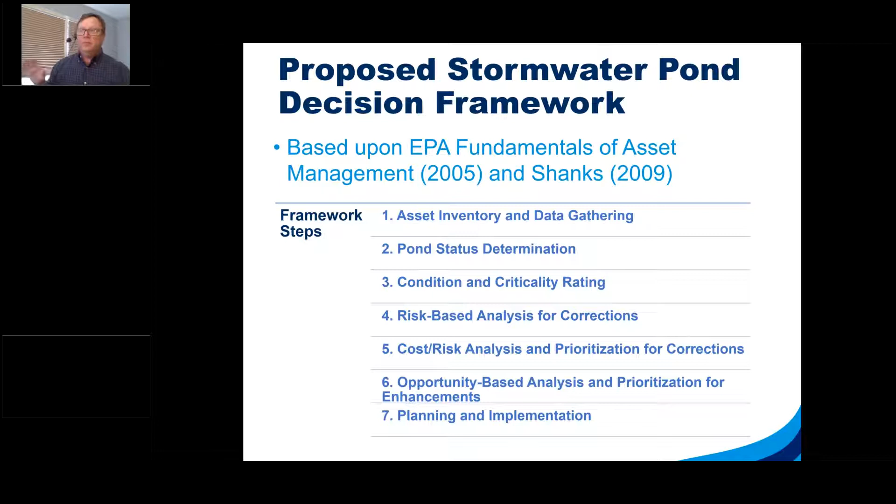We've got 7 steps. You could have 6, you could have 10. We chose 7 on this. We'd love to get input from others as much as we can. We do know that there are other decision frameworks out there. There's a million ways to look at this.

You could have flowcharts. This is an example of a flowchart that kind of gets to the same type of thing. This is from Kitsap County in Washington state. They manage half of the ponds in their area, and this is a way for them to understand how they can make decisions about retrofitting, as an example. This is another example from EPA Region 1.

I think it's from New Hampshire.

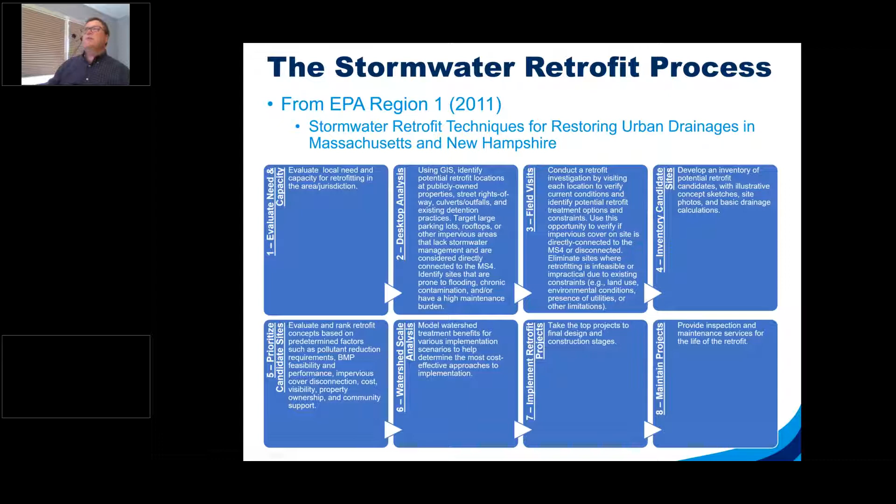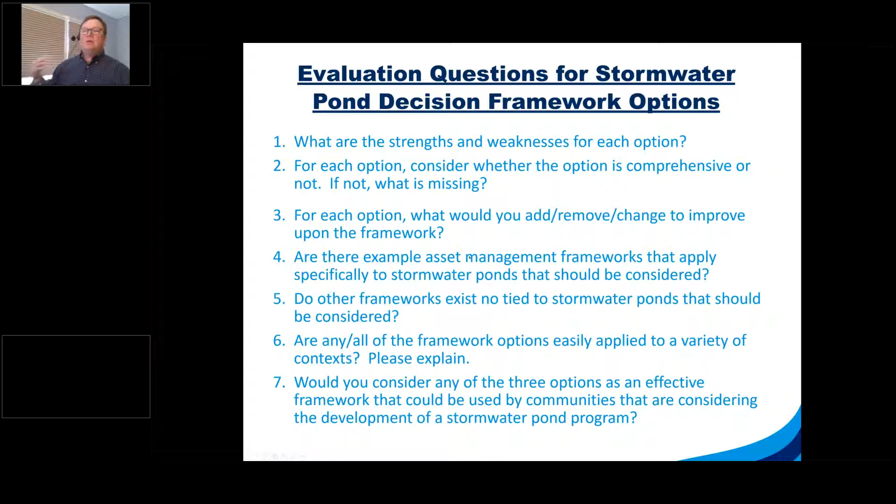Again, it's an 8-step process looking at retrofitting in general. We're talking specifically focused on ponds. So I'm not going to go through all these questions, but all this information is made available for you to look at. If you're really interested in providing input, we'd love to see it. These are the kind of questions that we're hoping to get addressed through this input from different folks.

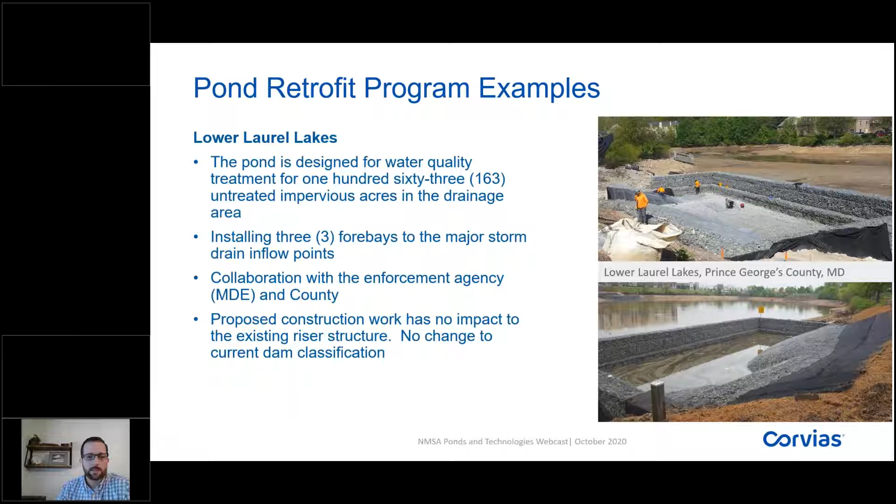Here's another example, Lower Laurel Lakes Pond. It was designed for water quantity treatment, but we've been able to retrofit it and provide water quality treatment to 163 untreated impervious acres in the drainage area. Again, it's another opportunity where we've created a mechanism to get in and get those sediments out as needed and as quickly as possible.

The other great thing about ponds is that not only can a retrofit bring water quality function to an existing water quantity pond, but it also gives you the opportunity to work with the jurisdiction to armor that pond for future resiliency issues. For example, here, as we went through the restoration process, we restored the emergency spillway and reinforced it with Flexamat. A lot of times, in order to get a water quality benefit, we're also enhancing the volume and capacity of the pond, so there are multiple benefits overall.

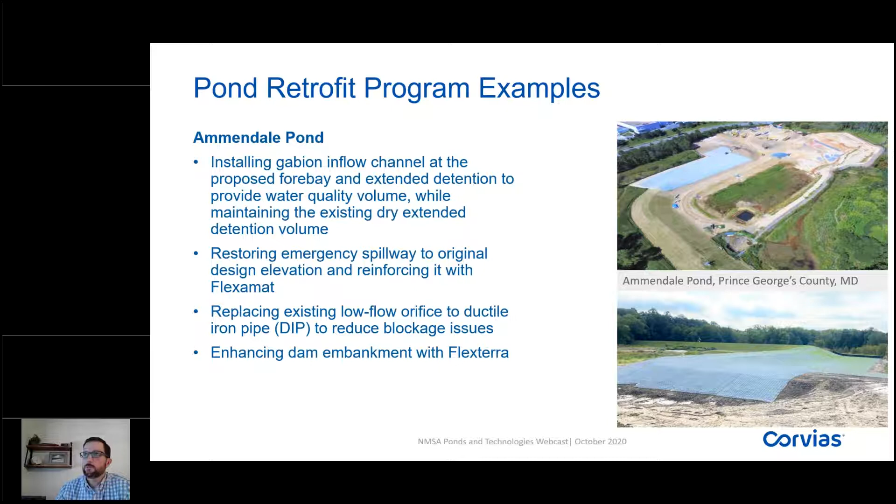This next example is a unique project we have in planning that's hard to come across in a lot of cases, where we're actually going to create a new pond in an existing dry creek. It's hard to get access to this type of property, and we were able to collaborate with a local private developer who is giving us easement access to put this pond on his property. It's a benefit to him, but also to the overall drainage area. There's currently 190 acres, and we will get water quantity control for about 190 acres with this pond.

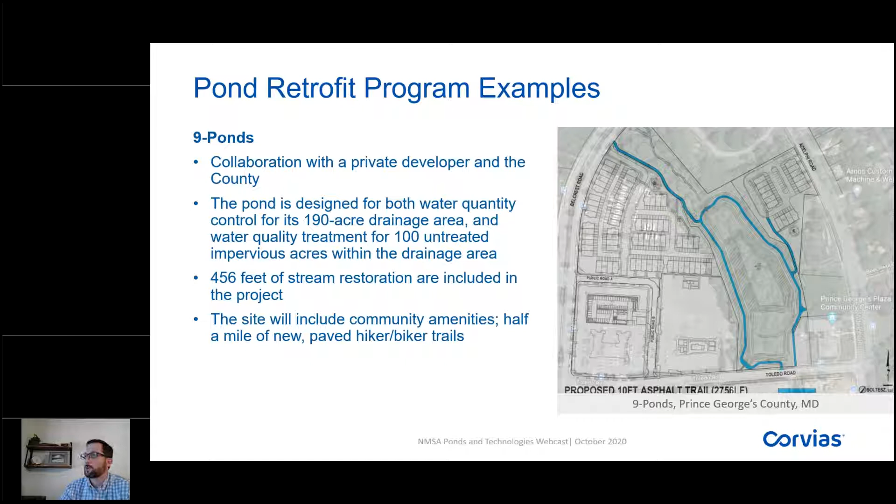It's an in-stream pond. Like I said, it's a dry creek bed, but it's designed in a way to allow water to flow through versus having a typical dam or embankment with an outfall associated with it. Also, as part of this project, we'll do about 456 feet of stream restoration.

This last pond example is a unique situation in the city of Chester, where there's not an existing pond. We have an existing park with really large flooding challenges. Part of our solution, which we're working through right now with the jurisdiction, is to create a large retention basin. We'll probably be looking at leveraging technologies similar to what Opti provides in order to control the levels of the pond and get the maximum benefit out of the retention of that facility.

So long story short, this is kind of where I wrap up and ask for your questions.

The key for us and the investment we'll make long-term in technology is related to the long-term maintenance of these programs. As we build this inventory of assets, it's going to be really important to make an investment at some point at a bulk rate on monitoring the flows and the capture of these devices, so that we can disperse the crews appropriately and efficiently to maintain these ponds. As everybody's discussed previously, that's the key to reducing the pollutants. So that's my speech. Thank you.

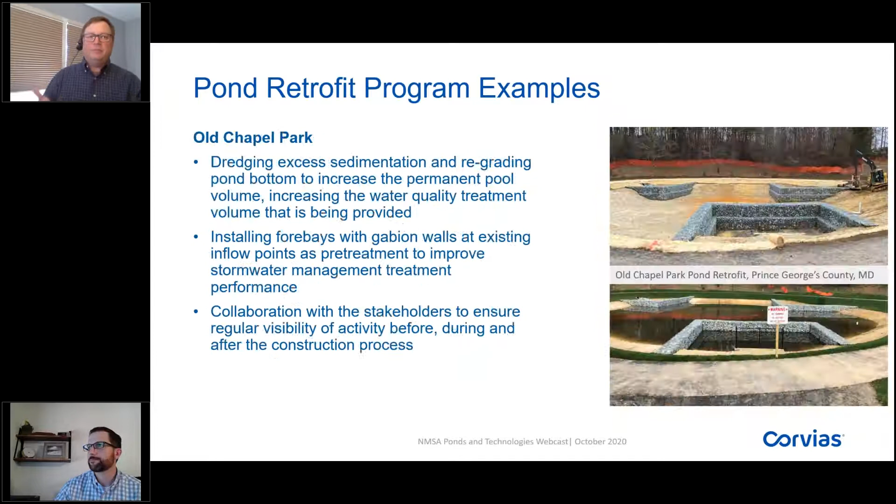There's other aspects of this which are fixed fee, right? So there's a certain risk that you do - there are some elements of P3s that you guys do take on, which is taking on risk. You could provide private financing support, but you're kind of agnostic on that, as I understand. So are there some nuances there you can talk about? Because that's going to set up our poll question, and then we'll move on to the next speaker.

Yeah, there definitely are, and I think what's important is it's a customized approach, depending on the community and the jurisdiction. You're exactly right, Seth - a lot of times we're going to bring the benefits that the community wants to see, and each community has their different goals. If a particular community just wanted high efficiency delivery, which is closer to what we see in certain jurisdictions, then we are going to set the program up that way, and make sure that the teams and firms we put together and the way we build the program reflects that.

So you mean high efficiency versus social or community kind of - is that what you're talking about? So like lowest cost versus providing support to the community, is that the balance we're talking about? Right, you can have both. Generally it's going to be lower cost overall because of the scale that we're working at, and the fact that we're 100% focused on this.

Our only goal in life is to be focused on delivering the set scope that we agree upon with our partner, and we operate almost like an owner's rep, where we're making decisions and working with our partner, managing the process and delivery of the program to get those outcomes that they want. Those outcomes are established through that partnering effort, which is really important up front - when you're entering into these partnerships, it's really important to establish what are the goals in that local community.

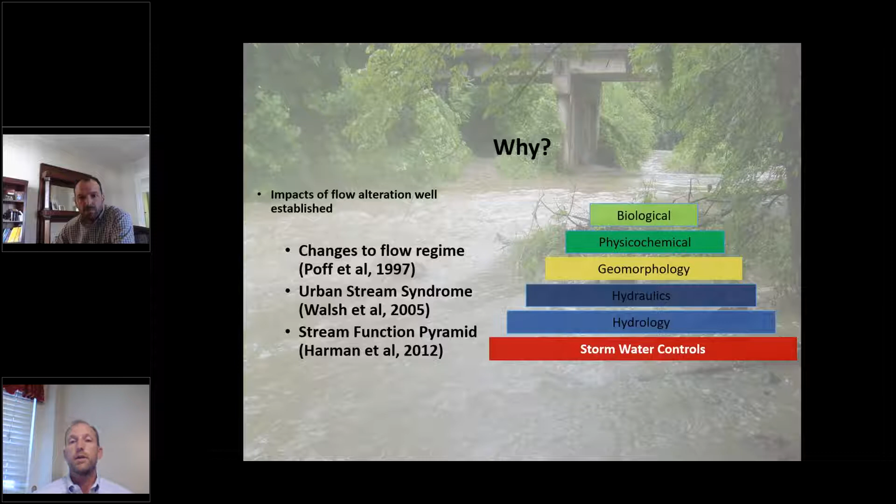That led to further work, maybe more suited for practitioners, the applied side of things—looking at things like the stream function pyramid by Will Harman in 2012. This was one of the things that got my wheels turning and got things moving inside my agency, that maybe this is the approach we could take. As the stormwater utility designs requirements and performance standards for stormwater controls, if we keep the hydrology in mind, we can reduce the impact. If we design our controls such that we're mimicking or matching hydrologies, then we can have a positive impact throughout the stream as it moves up the pyramid.

So you have to wonder what's taken so long, some of the barriers we've dealt with in the past. We've heard a lot about different things, and a lot of it has to do with the lack of a goal or a target or a threshold. We didn't have that exact number to manage toward—it was more of a theoretical design storm that this should work. That was part of the problem.

Regional variability was something we didn't take a lot of consideration of. Historically, we've looked at stormwater management more as a broad brush approach, a one-size-fits-all, and that can lead to problems too. My own state of Kentucky is a perfect example—mountains in the east, swamps in the west, and everything in the middle. It stands to reason that management practices for the mountains wouldn't be as applicable in the swamps. So we have to think about the regional side of things.

We have to think about the baseline condition—if we don't know where we are, we don't really know where to go. So we really have to understand how the streams in our systems are reacting to stormwater runoff. Then there are other complexities we've heard mentioned already today, the social side of things—getting folks to understand why we need to manage stormwater, why we may need things like a stormwater assessment fee, which leads into the financial side of things, getting folks to understand these kinds of things don't happen for free.

And then unfortunately, there's the political side of things, because rarely do we get policy development without politics being involved. So we have to do a really good job of talking to our elected officials and making sure that political appointees who help manage utilities really understand what's going on behind these decisions.

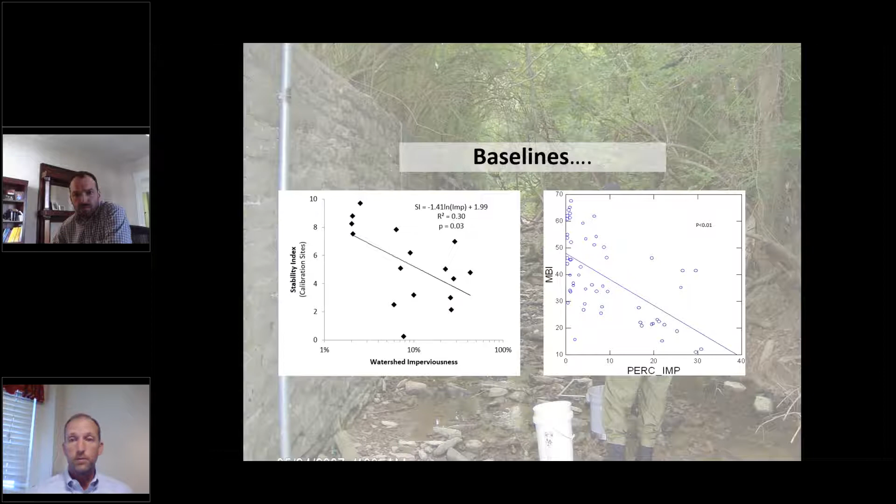We took all that information to establish our baselines. Again, we needed to know where we were in order to know where we were to go. We have been able to document that streams are becoming more unstable as watershed imperviousness increases. We're seeing the same kind of trend within our biological communities, as our biotic indices go down as impervious surface increases. These are well-established trends, but in order for us to really demonstrate that we're doing a good job, we need to establish this in our region as well.

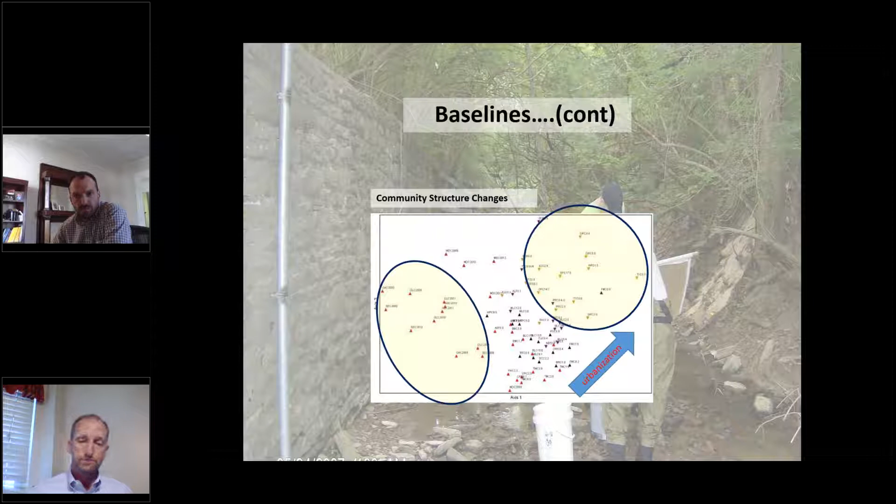We needed to establish the thresholds I mentioned. If we do want to have a program such as this, we need to understand what that threshold is. That introduces the critical flow concept - where's the point in our streams that the bed load begins to move around and the banks begin to erode? And we've been able to do that in northern Kentucky.

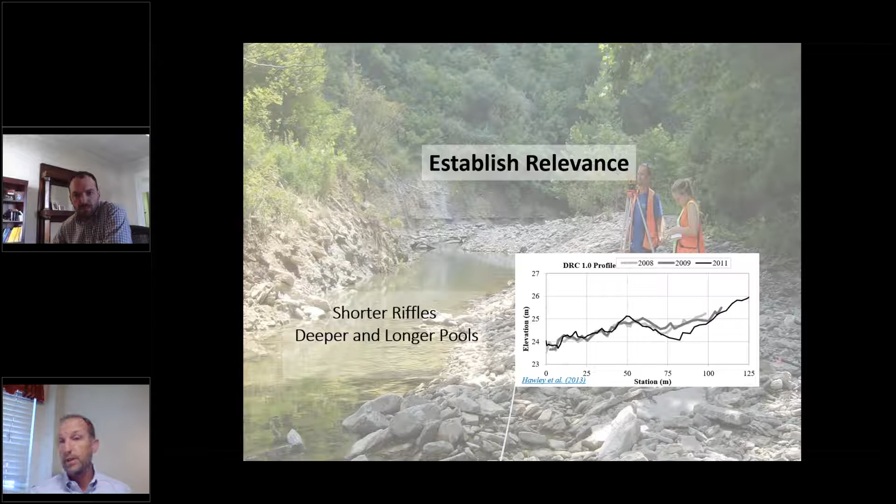We've established the relevance of those programs. We're seeing things like riffles getting shorter and pools getting deeper, which we know can be detrimental to both the habitat evaluations as well as the biological communities that live there.

Making even further argument for the biological relevance of the approach, we kind of stumbled into an accidental experiment a few years ago. In 2011, we had a very wet year in northern Kentucky, double the amount of precipitation we typically get, coupled with some very large events mixed in. Our best reference stream, which always produced very high diversity and high quality index scores, reacted as though it was an urban stream with communities more similar to what we see in our urban system. However, in 2012, when precipitation patterns returned to somewhat more normal, the stream recovered. We're not seeing that recovery in the urban system, which makes an even further argument for working with the hydrology within the system to restore the streams.

Excellent, thank you Matt. Matt set the stage really well, and I know this webinar is on ponds, but this baseline background information is really important for this setting.

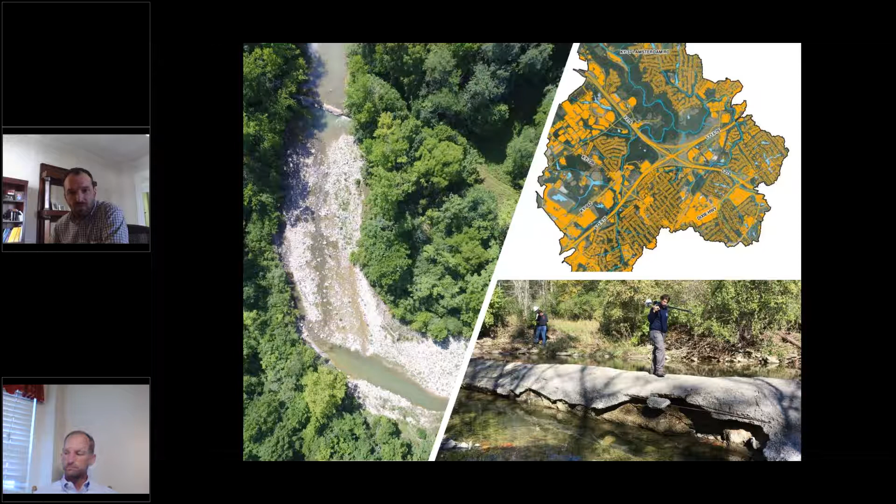One of the things you all will not be surprised about - take this watershed here, Dry Creek, and the relevance to the politically appointed board members, for example. An unstable stream is not ecologically beneficial, but it's also not even in the best interest of the sanitation utility. Here's one of the main trunk sewers in SD1's jurisdiction, and over 40 years of down cutting about 5 feet or so at this location, you've exposed the stream and put the sanitary sewer at serious jeopardy of potentially failing and causing a direct discharge to the stream. So once unstable streams started impacting SD1's assets, it became even more clear the financial relevance of managing stormwater to prevent these down cutting trajectories, bank erosion, and channel instability in general.

In terms of water quality, we measure for everything, but bacteria and sediment are by far the number 1 and number 2 pollutants in our developed watersheds. Sediment in particular reaches up to 65 times benchmark loads in some of these developed watersheds, and we have pretty good evidence that a large majority of that sediment is coming from bank erosion of the stream banks instead of the catchment.

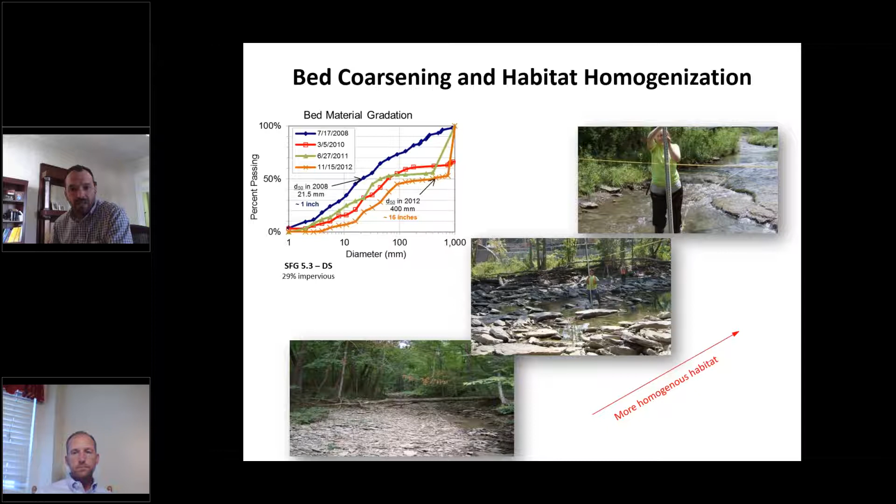Matt mentioned some of the trajectories we're seeing in the stream. Habitat homogenization and bed coarsening is one trajectory. Here we see shifting bed material over a 4-year period. The D50, the median particle size, went from 1 inch to about 16 inches over that time. So we see coarser, less well-mixed particles, less diversity, and fewer niches for the critters that live in these streams.

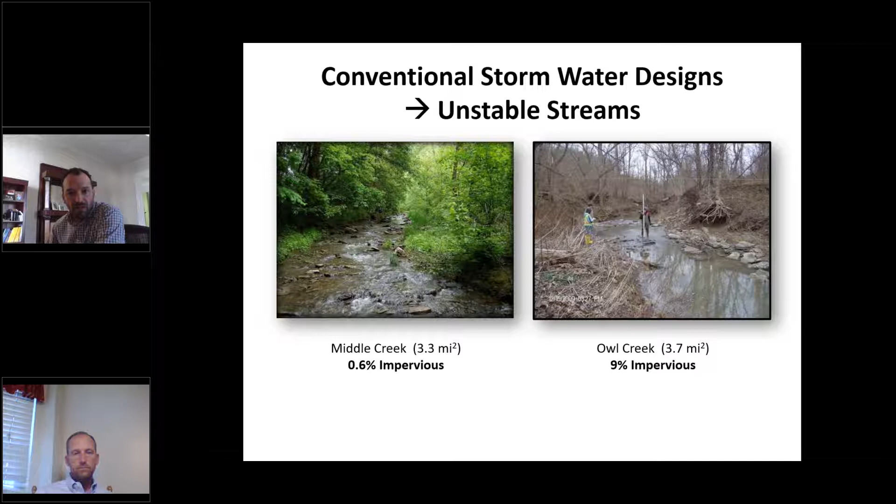Matt's monitoring program established pretty well that conventional stormwater designs were leading to unstable streams. Here are two sites with very similar drainage area. The only difference is imperviousness, and pictures say 1,000 words, but so do the cross-sectional surveys. The suburban stream, at 9% impervious, is about 9 feet to the floodplain. Middle Creek, our reference site, is only about 3 feet to the floodplain.

As Matt already mentioned, we see a very precipitous drop-off of EPT richness—that's the mayflies, stoneflies, and caddisflies, the more sensitive species. Once we get above 3% impervious area, we see pretty clear impacts to these taxa, and above 10%, we've pretty much bottomed out. So it's clear that conventional stormwater management is not protecting stream stability or aquatic biodiversity.

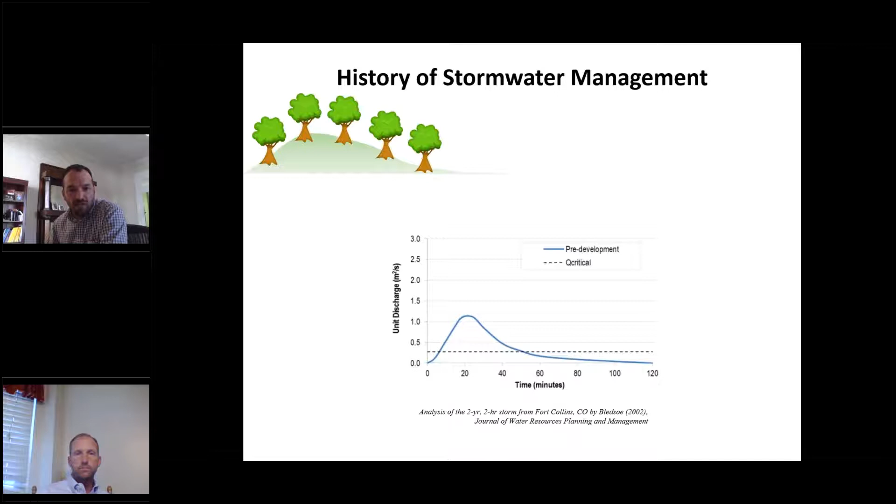Getting back to the idea of ponds, it's important to remember the history of stormwater management. Let's take a pre-developed flow regime—this is the 2-year discharge as an example. From pre-1950s all the way up to the 1980s or so, you develop the watershed, add roads and houses, and route that stormwater as quickly as possible to the nearest creek. So all that extra volume has resulted in an increased peak.

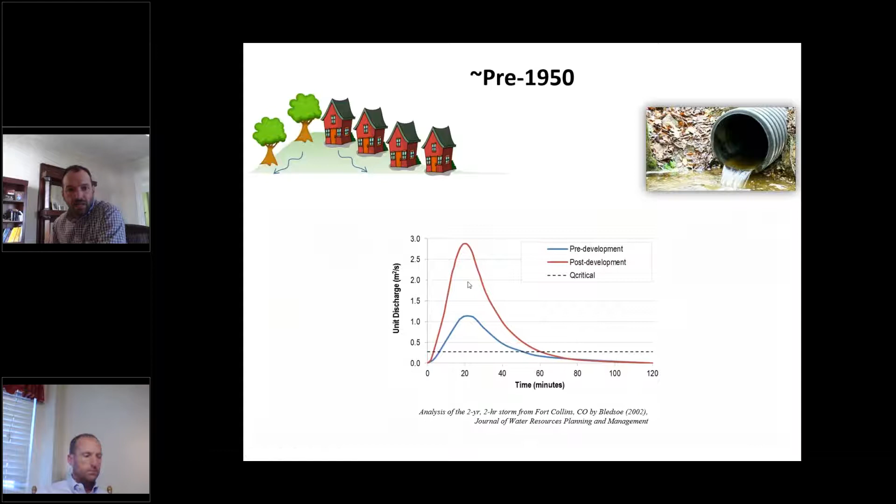That led to flooding downstream, and engineers scratched our heads and said, this isn't good—we're supposed to protect the public. How do we stop that? So we came up with this idea of peak matching: you take that extra volume, route it into a detention pond, and hold it back so you're not exceeding the pre-developed peak discharge for a given design storm. But you've got a lot more volume that you're releasing at those relatively large flows.

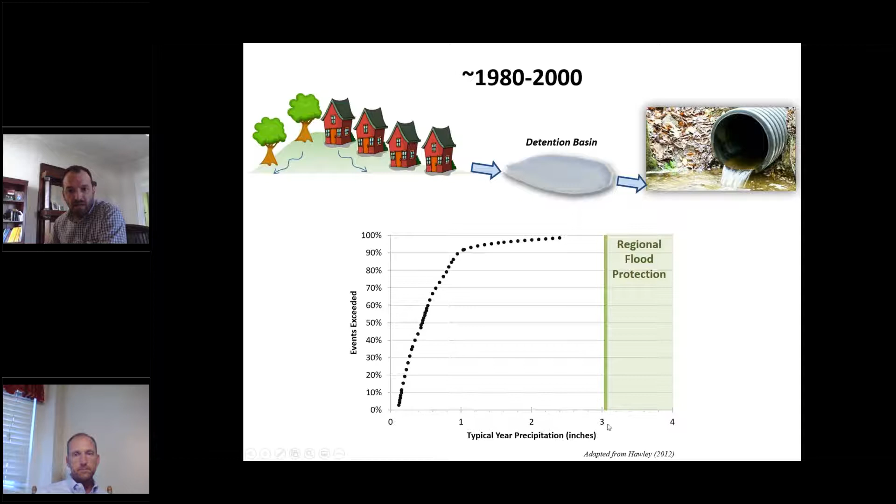You look at most stormwater ponds, especially dry detentions, and they're almost always dry, even during rainstorms. Yes, I do use my kids for inspecting basins sometimes, but the reason they're mostly dry, even during events, is that they're typically sized for and their outlet structures optimized for regional flood protection. It varies by jurisdiction, but in Kentucky that kicks in at about 3 inches of rain. Of course, 99% of the storms in a typical year are much less than the 2-year discharge.

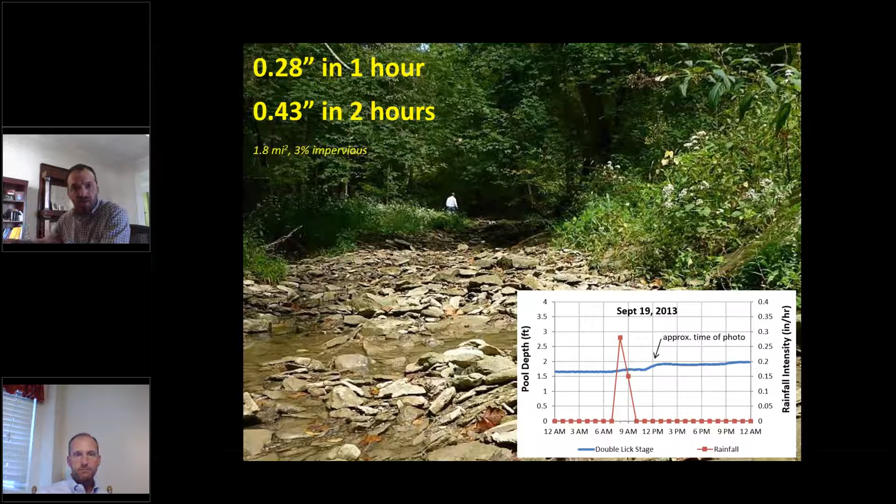So what happens in an undeveloped watershed? The water infiltrates, hits the leaves, slowly makes its way to the topsoil, and then in Kentucky, where you've got a clay subbase, it hits that subbase and seeps down the slope, eventually making its way to the stream about 3 hours later with this little blip in the hydrograph.

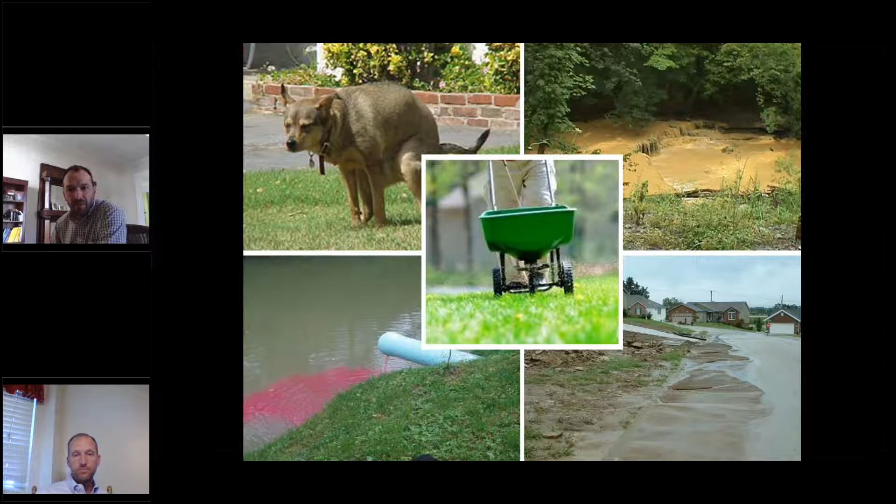I'm sure a lot of the pond webinar has focused on water quality concerns. Going back 20 or so years, that was a big deal that ponds were not dealing with, so the idea of the water quality volume came into fashion in the 2000s or so—taking a reasonable amount of water, say 80 or 90%, that captures 80 or 90% of the storms in a typical year, and getting it routed through some sort of treatment.

So you take a detention pond and you put a sediment forebay on it, and you size the outlet structure to be kind of an extended detention basin, like some of those Gabion retrofits we saw from Pete in terms of knocking down the sediment load. They take various forms—they can look very pretty and really fit with the community, with what their goals look for at a specific location.

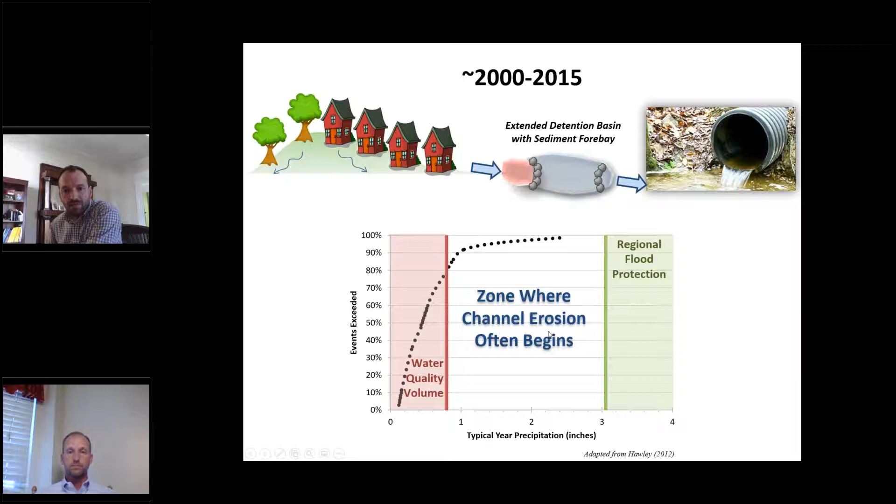But in terms of channel protection, the zone where channel erosion often begins is in this unmanaged zone of rainfall. So let's get back to that critical discharge. Matt mentioned it earlier—it's really the discharge above which you are mobilizing the material on the bed.

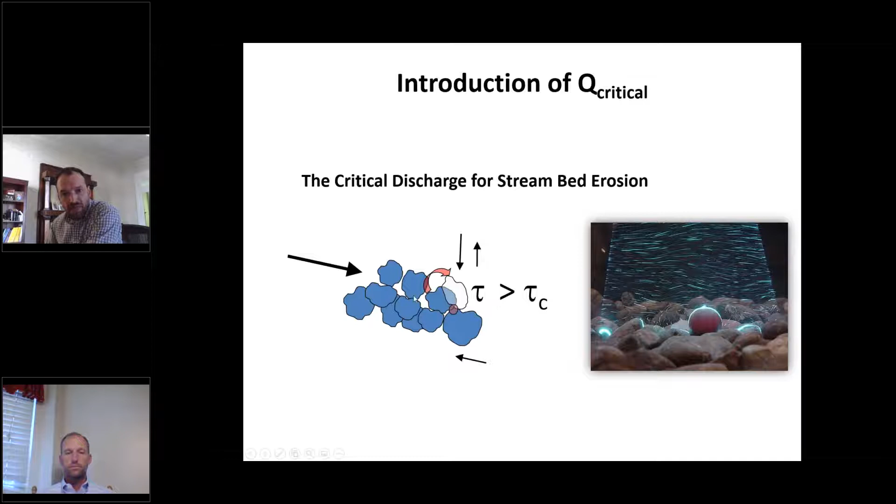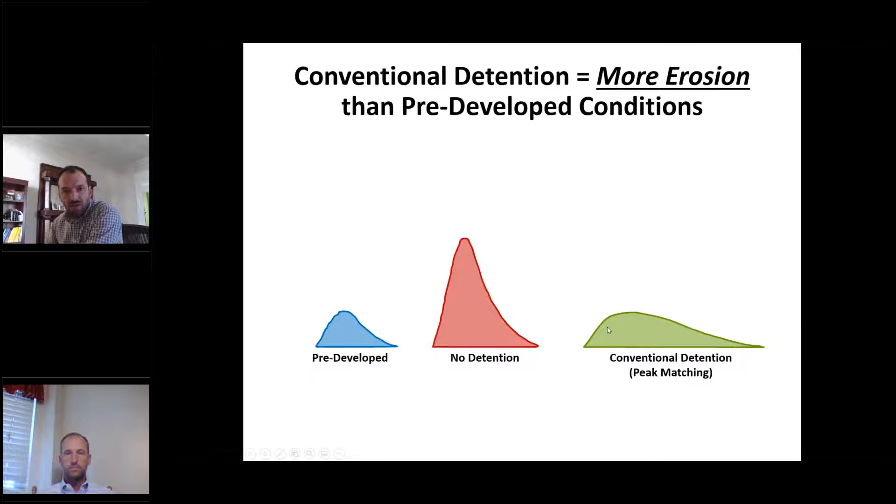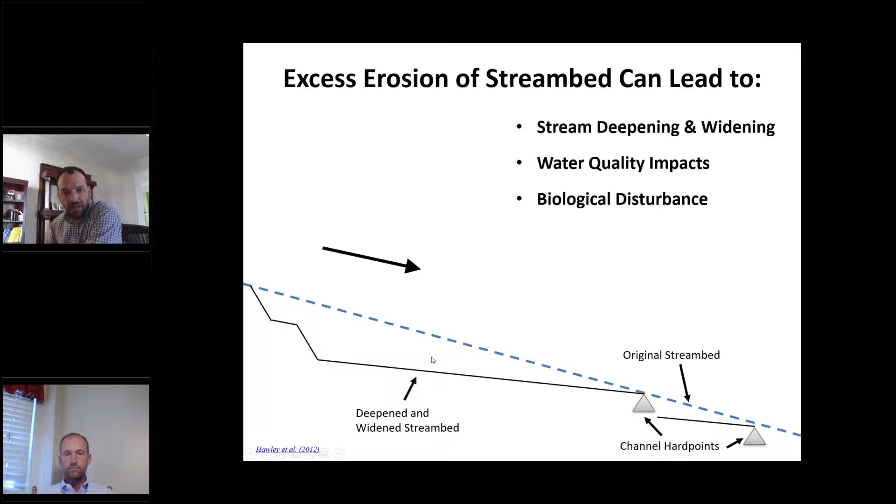That leads to more erosion than the pre-developed condition. Excess erosion of the stream can lead to stream deepening and widening, water quality impacts, and biological disturbance. So imagine you continue this over and over—the particles get mobilized, they're not replaced from upstream, and over time you've scoured out those particles from your original stream bed.

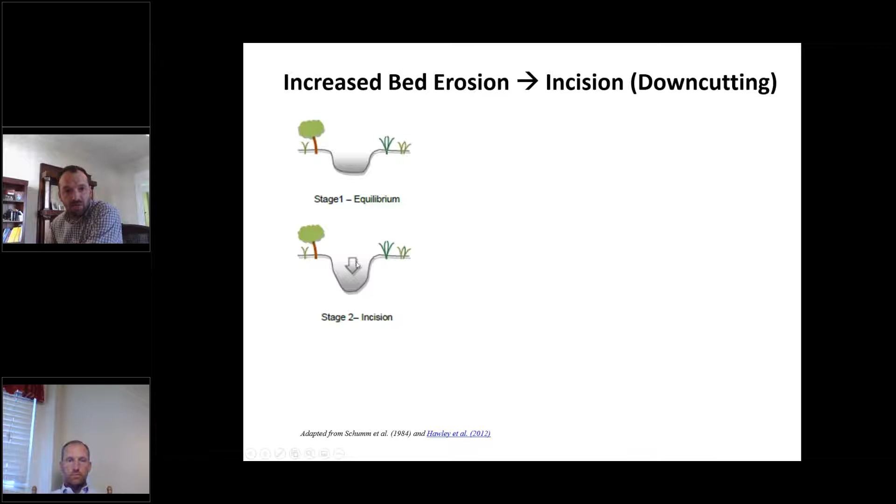You basically create a deeper and wider stream bed. This trajectory of instability we've seen across the U.S. You take an equilibrium channel with a good connection to the floodplain, mobilize those particles on the bed too frequently, they're not replaced from upstream, and suddenly you've made it deeper. As you make the stream deeper, you make the banks taller, leading to bank failure and widening. You need a lot of widening and flattening of the slope before you start to see deposition of material, aggradation, and eventually a return to equilibrium.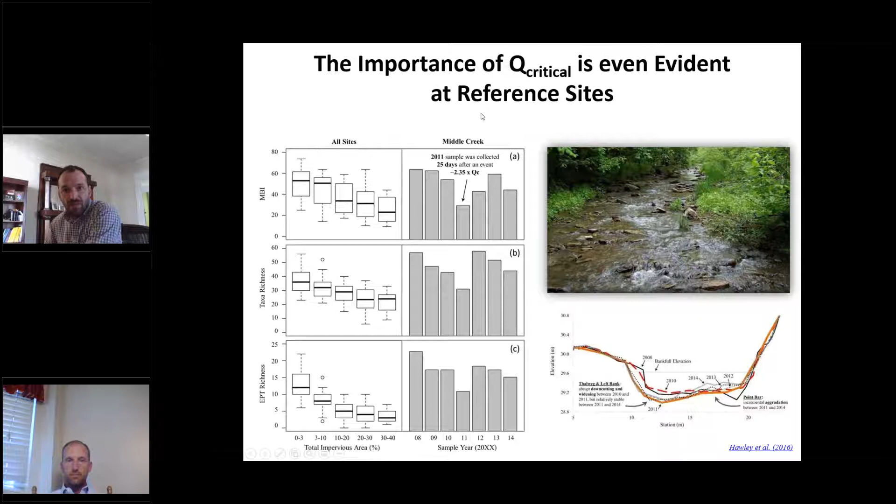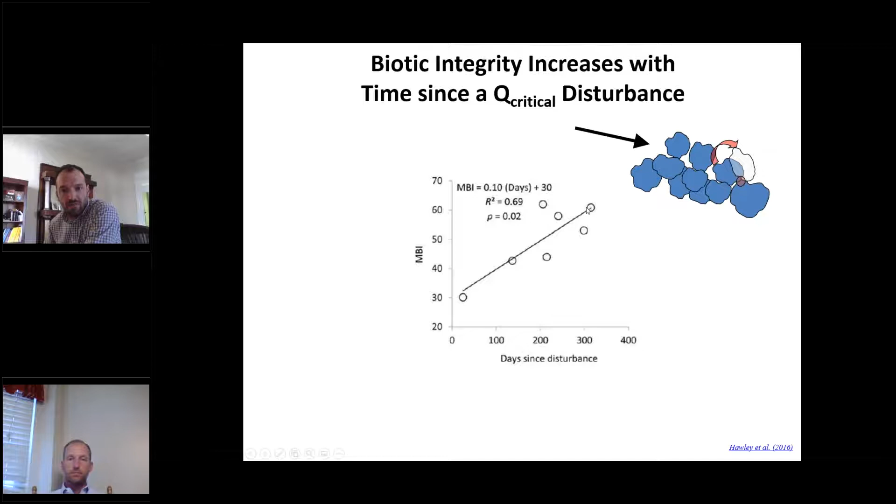So the importance of Q critical, as Matt mentioned, is even evident at reference sites. He mentioned this slide earlier, but to put it simply: MBI, the biotic integrity of macroinvertebrates—a measure of biotic health—increases with the number of days since a disturbance event. The longer period since a Q critical disturbance, the better your MBI at this reference site. So biotic integrity increases with increasing recovery time.

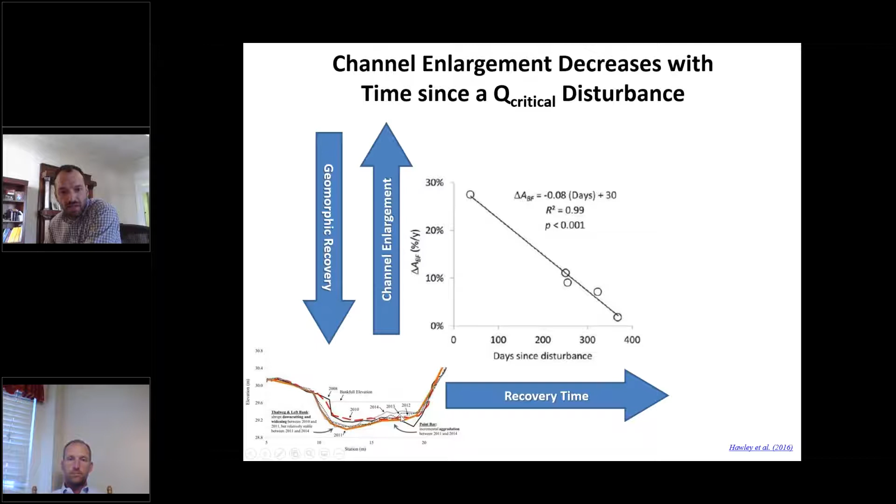Channel enlargement decreases with days since disturbance events. So the more time you give a stream between disturbance events, the more time for geomorphic recovery as well—processes like bar building and colonization of the bar by vegetation. So Q critical is clearly relevant geomorphically and biologically, but there's a lot of scatter in these data.

And so we take that, and now it's a matter of piloting some retrofits. We're going to take a hydrologic restoration example, a detention basin retrofit example that SD1 and Sustainable Streams piloted with US EPA and Boone County Conservation District and a few other partners. Here's the before outlet, here's the retrofit outlet.

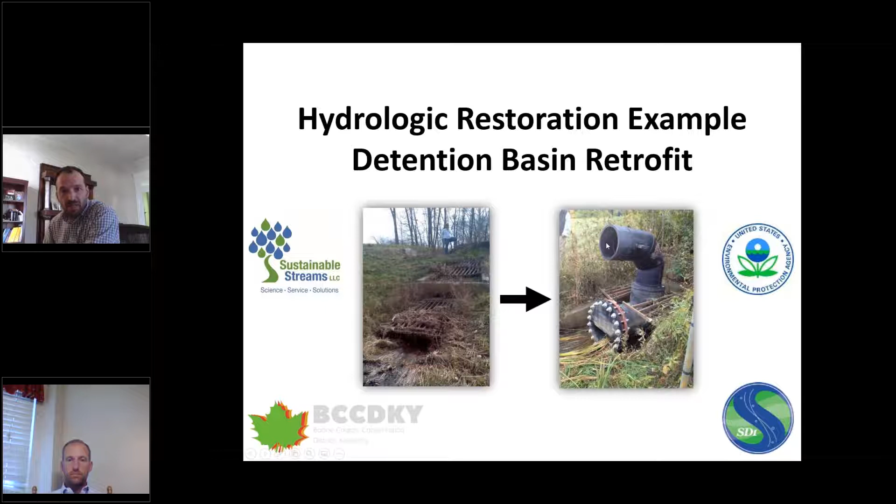So you take a 24-inch outlet that was the low flow outlet, and we've choked it down to about an 8-inch opening. That basically restricts any given day's precipitation. And we've got this passive bypass that allows flows during larger events to get out and access that entire 24-inch diameter orifice, so that we're not really increasing the risk of overtopping during, say, the 100-year events. As I mentioned, a lot of partners on this one.

This passive device here, they call it the Detain H2O. It is patented, co-patented between US EPA and Sustainable Streams. We've written up a manuscript about it, but here we're just going to show you some examples.

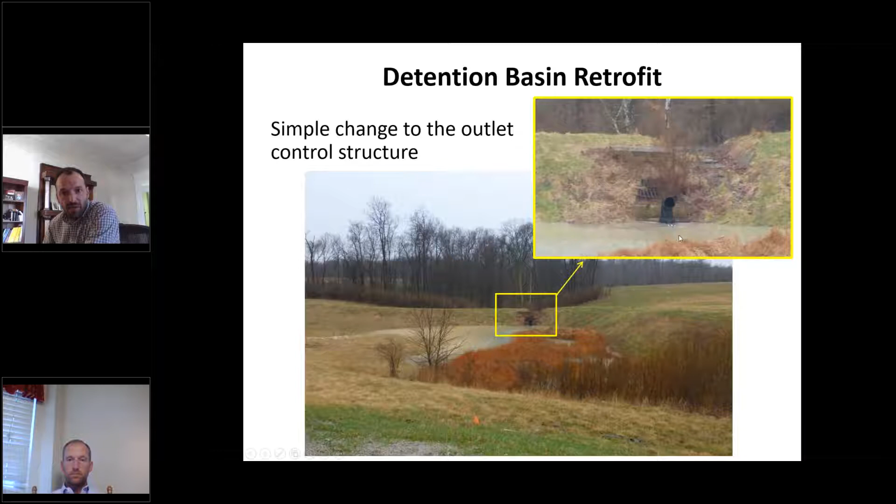So a simple change in outlet structure. An event that probably would have passed right through, barely ponding to the top of the original orifice here. But because we've got that restricted outlet in, we're holding back that water and allowing for sediment to settle out and so forth.

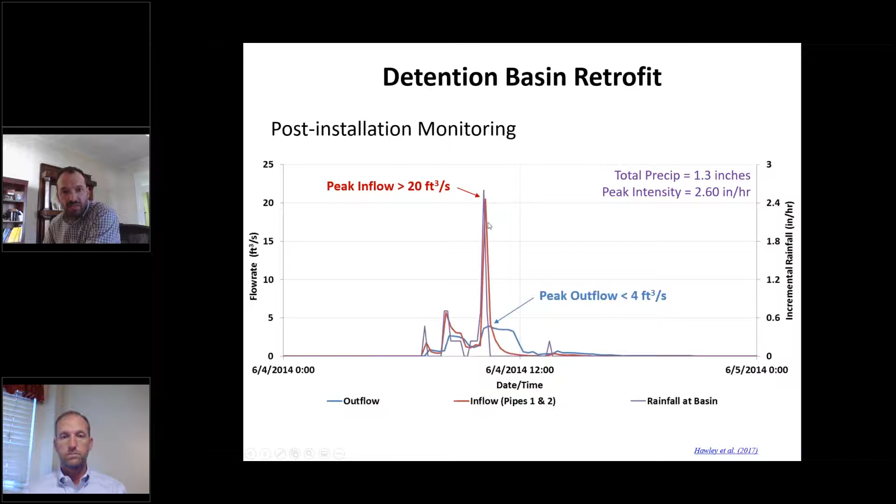So an example hydrograph: take a peak inflow of about greater than 20 CFS, we've restricted it to be less than 4 CFS, and here's some pictures that track with the hydrograph. So we get the big flush coming in, you see it's dirty, loaded with sediment, right?

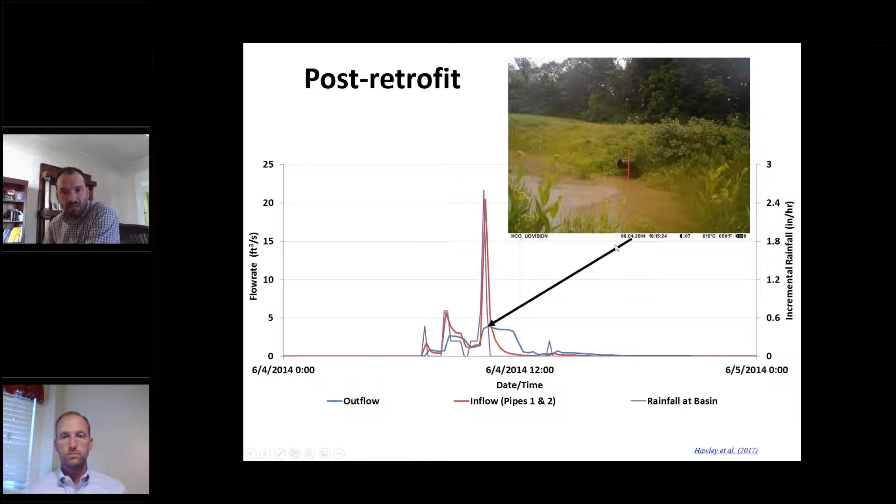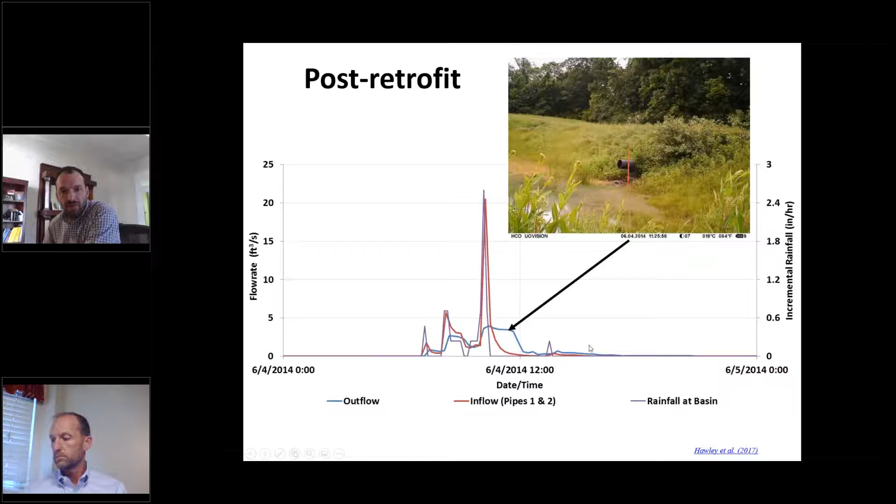Giving that sediment time to settle out, potentially more UV exposure and so forth. And then after about 3 hours of extra ponding, than would have occurred under kind of the inflow-equals-outflow condition. The peak continues to go back down, and then we got a very prolonged kind of trickle release, through that kind of wetland vegetation that's established in this basin.

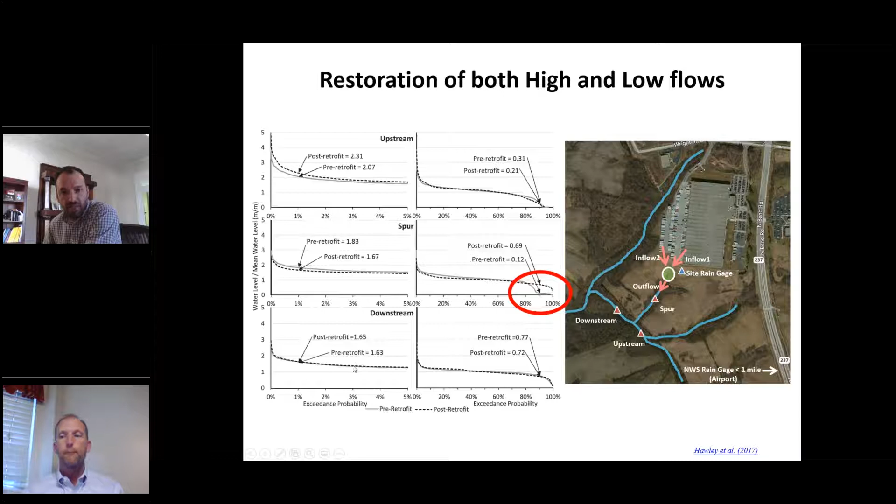So we're seeing fish in these pools in a system where we never saw fish before. So we're seeing that biological lift that Matt talked about earlier.

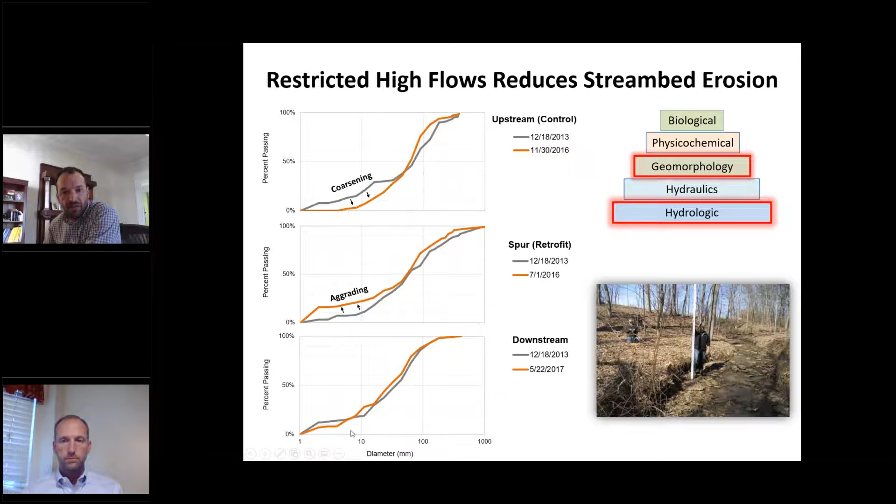In terms of our sediment, we're seeing continued coarsening of the bed material at our upstream control site. We're seeing aggradation at our spur site. And then, at least for that initial period after the retrofit, we saw basically equivalent bed material at our downstream site.

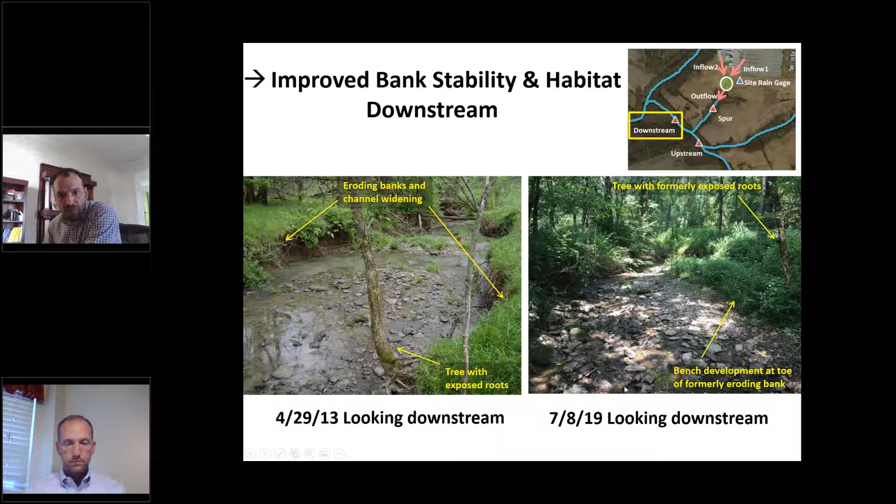Looking downstream at our downstream site, again, pre-retrofit, we saw vertical eroded banks, a tree with exposed roots. About 6 years later, we see a bench that's formed, that's vegetated. We no longer see the exposed roots of this tree. Our bank stability has improved, and again, we're seeing kind of more of a meandering low flow channel instead of a totally over-widened chaotic channel.

And again, pictures do a good job of telling the story, but that trend at the downstream site was also captured by repeat surveys. Here we see the sediment bench that was developed at the surveys at the downstream site, and then again that was eventually colonized by vegetation.

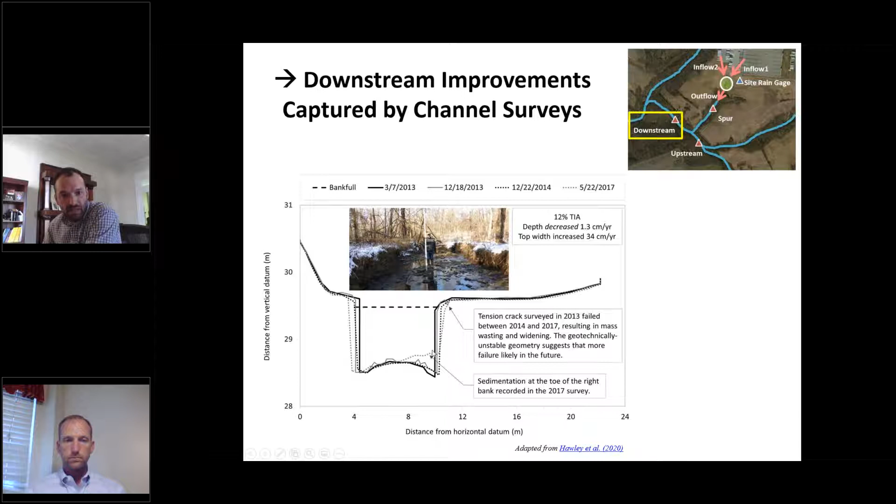And then at our upstream control site, here we have pre-retrofit, a vegetated bench, decently vegetated banks, and then after, about 6 years later, we don't really see the benches anymore, and we do see bank erosion at our control site. So basically, the upstream site continues to get worse, while we see improvements at our spur and our downstream site.

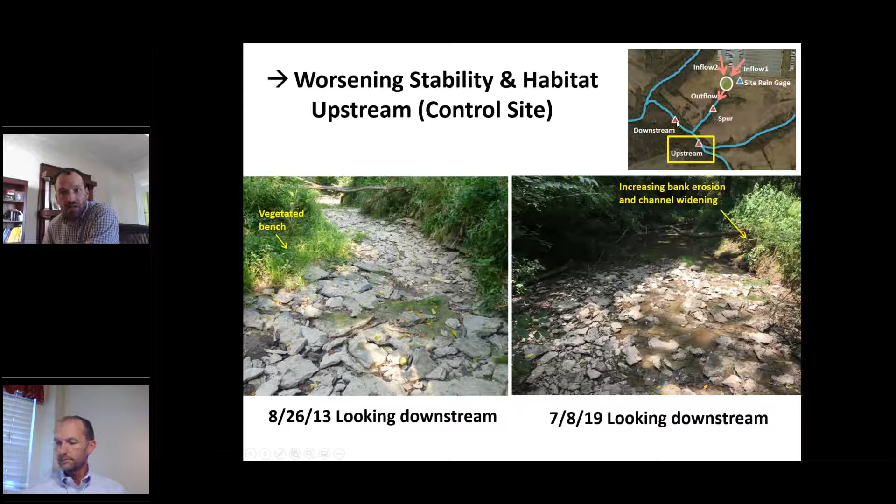So we have since looked at many detention basins to try to do this at a larger scale. Here's an example of one of their watersheds at SD1 where we got very poor stream conditions, draining lots of detained areas, but they've all pretty much conventional detention. And again, opportunities for retrofits.

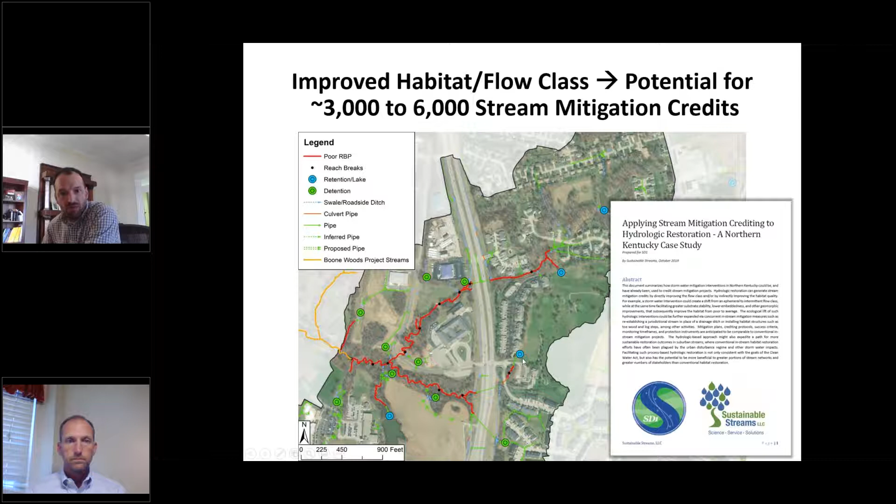We've been developing this methodology with input from the Army Corps of Engineers that if we do this hydrologic restoration, we have the potential to bump these streams up from poor to average. If we couple those with conservation easements along these stream corridors, and potentially some wood being added in the stream, we could generate up to 3,000 to 6,000 stream mitigation credits, and basically start reinvesting some of those mitigation dollars that developers pay in Northern Kentucky into paying for hydrologic restoration and stream corridor conservation within the same jurisdiction.

So with that, I'll hand it back over to Matt.

Just real quickly to take the scaling up idea to the next step: SD1 is so encouraged by the results that we're seeing in stream from even these small scale retrofits that we took the opportunity to inventory our entire service area for the existing basins that we have, with the idea that we're going to start proactively retrofitting the basins and bring them up to our current performance standards.

We got over 2,300 basins in our service area alone, and we've looked at the top 10% of those, and we are beginning to prioritize those right now. In fact, I just awarded the first contract a few weeks ago to go out and begin the early retrofitting.

To parlay a little bit more about what Bob said, we've been, for several years now, in discussions with the Army Corps of Engineers about the potential of hydrologic restoration being used for mitigation credits. After basically walking them through this program and keeping them engaged the entire process, they have sort of blessed us with moving forward and trying to create a mitigation bank in one of our most urbanized systems that's steeped in this idea of hydrologic restoration.

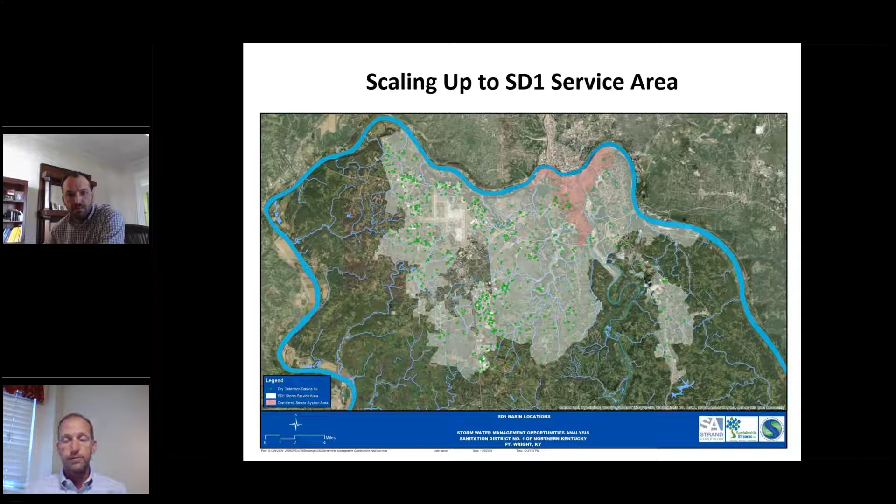So we're having a lot of luck, and we're really looking forward to what this program has for us in the future. And with that, I think that wraps us up.

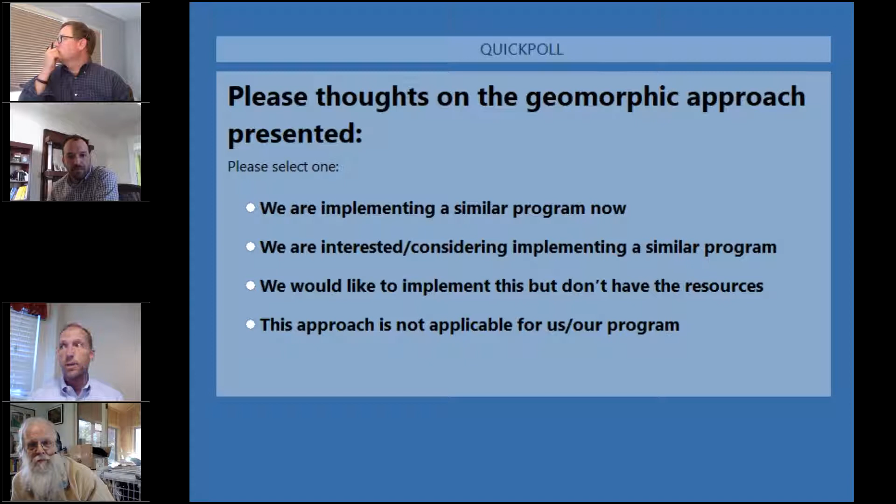I think to take that one step further, while we're not bound to this approach, I think one reason the Corps of Engineers blessed us moving forward with an urbanized mitigation bank, where they've been very reluctant to do so in the past, was that we established this and its relevance, and that we can actually have ecological lift doing these things. So from the regulatory side, I think it's really a trust issue.

Interesting, thanks. Okay, I'm going to close that poll and share the results with everybody. It looks like most are considering a program like this, and also a good chunk of folks, a quarter or so, just don't have the resources at this time.

Does that surprise you guys, Bob and Matt? No, I hear that comment fairly frequently, and I think one of the papers that Bob references was trying to help programs use some of the information we have to begin to tailor an approach to their own systems. You can correct me if I'm wrong, Bob.

Yeah, basically we've got regulations that require lots of things, but flooding and erosion tend to be top concerns of a lot of stakeholders. So giving MS4s the tools to connect stormwater management to not only flooding but also erosion prevention.

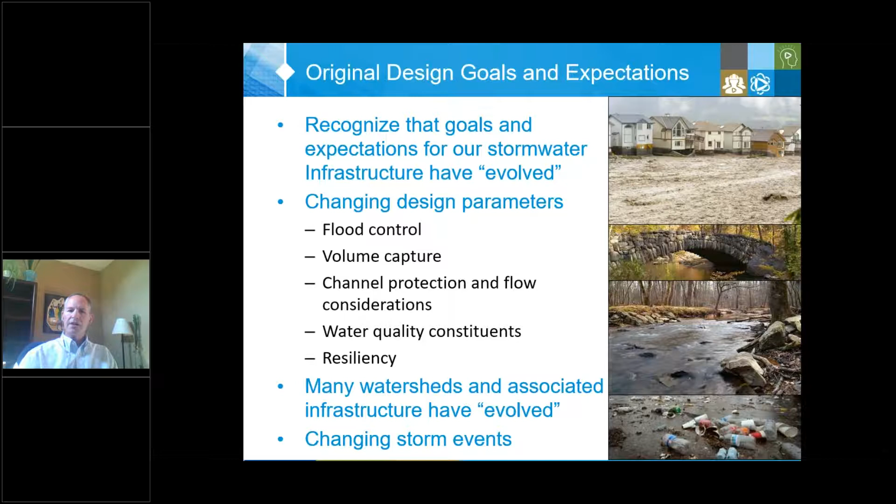A lot of us are updating to, for instance, NOAA Atlas 14 type of more recent information that updates our design events, but also looking at continuous simulation and then projecting forward, for instance downscaling some climate change models, and how we might use that information in the future to help determine what those design objectives need to be for our future infrastructure.

This is typical of what we see in a lot of locations. It's certainly present here in Denver, and I've seen it all over the country, where we have this change in our watersheds, not just from new development, but a lot of times infill and redevelopment that's occurring. These changes in impervious area, both with our new infrastructure and our changing existing infrastructure, really have effects that look something like this.

Matt was showing what those changes do for that impervious area on our streams, and we know there's a real documented impact of changes such as this. So with that, we have to change and manage our control systems.

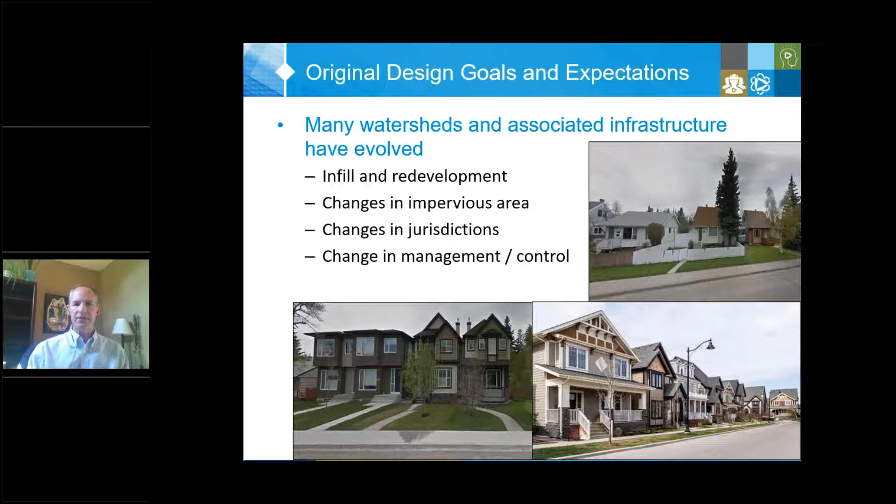The challenge with redevelopment is oftentimes this happens on a lot-by-lot scale, or maybe several lots at a time, but that doesn't give us the opportunity to change that existing infrastructure that was sized for a different type of footprint.

So on the inspection and asset management side of things, really knowing what our infrastructure can and can't do, and what was the original design. Was it designed for instance for a 2-year event or larger, just peak flows? Then determining what enhancements need to be done to retrofit that.

So obviously this is a discussion about retrofitting these ponds and different stormwater infrastructure to meet those goals. Understanding what can be done for that, and that's where we'll get into the technology side of things.

Then there's the asset management program in general, understanding the history and facility of the drainage areas, the lifespan of those original systems and how long they're supposed to last, getting to what Pete was describing with CBP3s, knowing where they are in their lifespan to know if the retrofit is necessary or if it can wait a little bit longer, et cetera. It's really a big part of this.

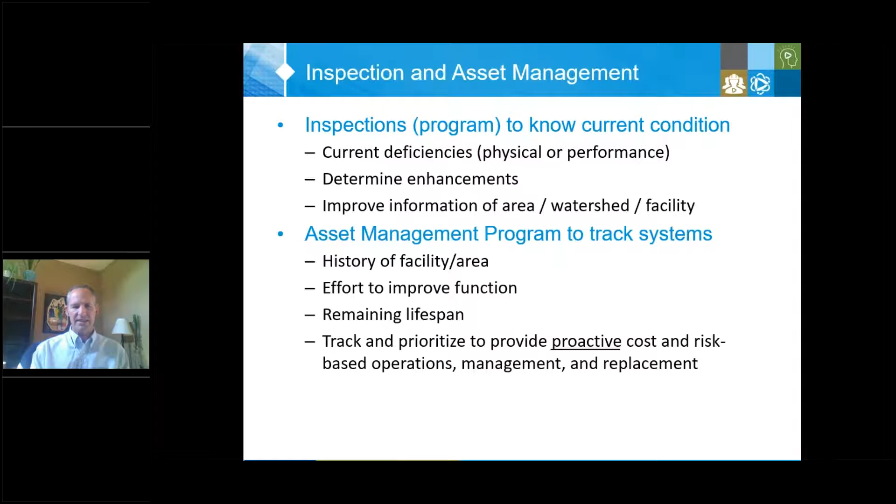Getting back to that whole asset management side of things for ponds, I think it's a critical piece of this that feeds into all of what each of us are talking about today.

Now, expected outcomes. I think one of the challenges we're all facing from the municipal perspective for our existing stormwater infrastructure is we're asking it to do so much more than we asked it to do before. We've already talked about flood control, water quality, and Matt and Bob were just talking about the receiving water protections, geomorphic conditions, ecological support, floodplain and groundwater connectivity.

Chris will be hitting on a little bit more about support for groundwater supply and connectivity, which is a big consideration for us on the west side of the country, where we're also trying to consider how we can replenish those groundwater supplies that have been diminished over time.

And then those indicators just discussed with watershed health. I think the rapid bioassessment protocols with your invertebrates are a great example of how we're looking at something like that. But we're also looking at a lot of our facilities now to not just be stormwater management tucked off in the corner. We're actually asking them to be a part of our recreational opportunities, having trails around them, having access and so forth.

So that needs to be a consideration as well. We'll hit on a little bit of that too.

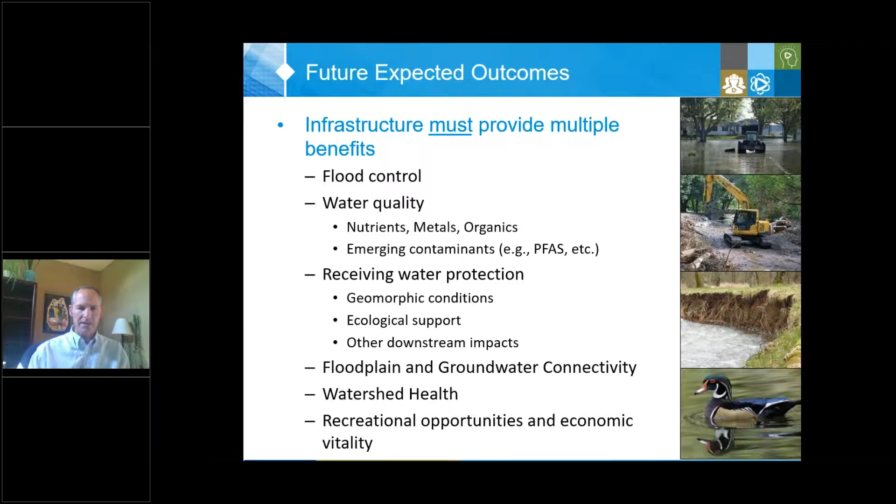So with all of this — this is probably dating myself a bit — we're going back to how our stormwater infrastructure can provide all of these multiple benefits, especially when we're being asked to retrofit these, and we're not starting with a blank slate like we would for new development.

It reminded me of the Six Million Dollar Man and the Bionic Woman, in that we can rebuild him, we have the technology. Well, for the retrofit of our stormwater ponds, we have the technology, and that's what we wanted to talk a little bit about today.

We've talked a bit about the objectives. We have some cool ideas and techniques coming from what Bob was discussing with those passive controls, and we'll hit on some other things that go along with that.

We really do want to build this better, stronger, faster — which maybe is more like higher performing, greater surety of compliance, cheaper to manage, and having public access to it so that people can enjoy these spaces and so forth. So we have to add all of those into this.

Some of the technologies I've mentioned or hinted at range from something relatively simple, like leveraging treatment trains and unit processes. Bob was talking about this great opportunity to retrofit our outlets for a lot of our ponds, and we're going to talk about that as well, but also including that retrofit with other types of technologies.

There were several examples given in both the Kentucky example and with what Pete was describing too, with the 4 bays and so forth, really taking advantage of that. Looking at additional treatment locations, I think it was great that Pete was showing where some of those opportunities to bring greater treatment area into these systems, and they've really focused on that for the Prince George's County opportunities. Ultimately, one of the technologies we're going to highlight, and Pete mentioned this one, was using automated or real-time controls to get at each of these types of objectives.

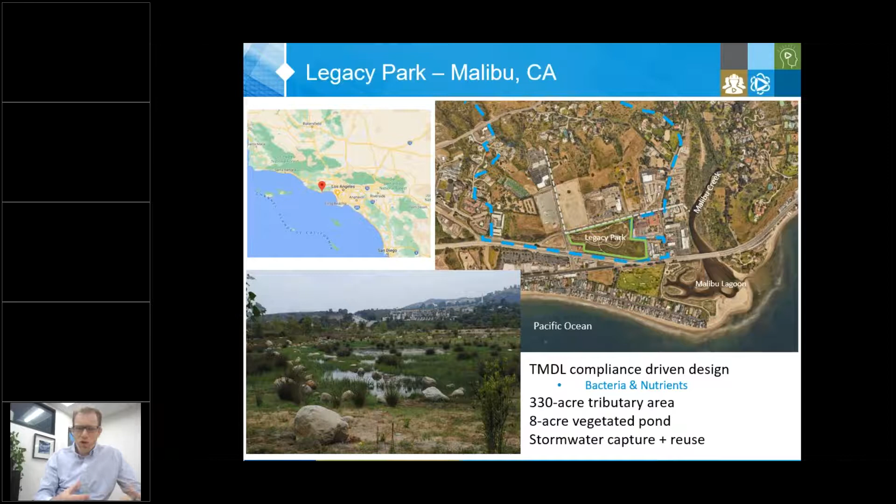Legacy Park, you can see in this aerial, and here's a close-up artistic rendering. Water comes in from the northwest through a bioswale, so you get some initial vegetative treatment, and it enters the pond, at which point you have a recirculation line to this ozone disinfection system. The disinfection system can operate at about 3 CFS. They were seeing stormwater flows of greater than 30 CFS on really big storms out into Malibu Creek. So the pond has been designed to allow them to capture those flows during storm events and still get treatment. Even in large storms, they can treat and discharge out to Malibu Creek, but in dry weather conditions and lower storms, they can treat and put it back into a subterranean holding tank, and use that water for irrigation of the park.

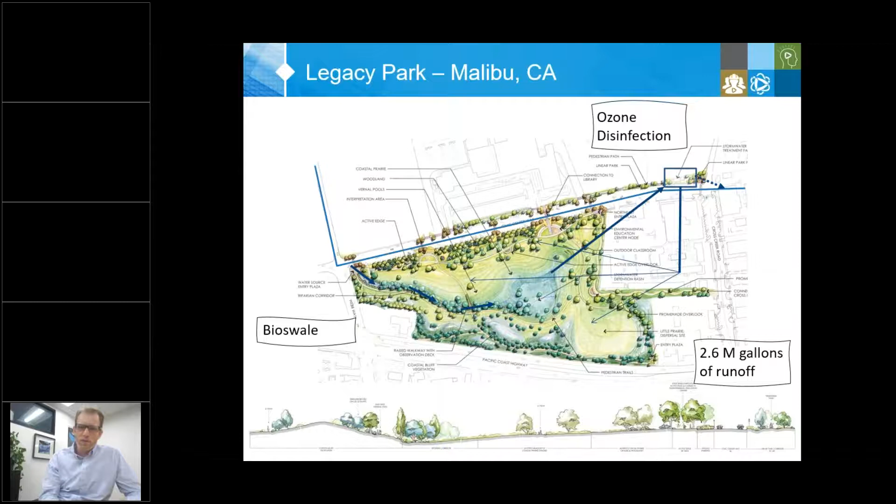Really neat system. The park itself is a beautiful centralized park for the city of Malibu with some really neat multi-benefit purposes, educational stuff there, coastal habitat restoration. A way we tell people about the project is you get basically 8 acre-feet of storage, 2.6 million gallons, in this pond, and the lower 4 acre-feet, if you will, is regularly used for recycling and irrigating the park itself. The demands there balance out really well. Then you have an additional 4 acre-feet of storage for stormwater flows in that area. This has been a tremendous project for the city and has helped them really meet their TMDL loads in this watershed. So really a neat project.

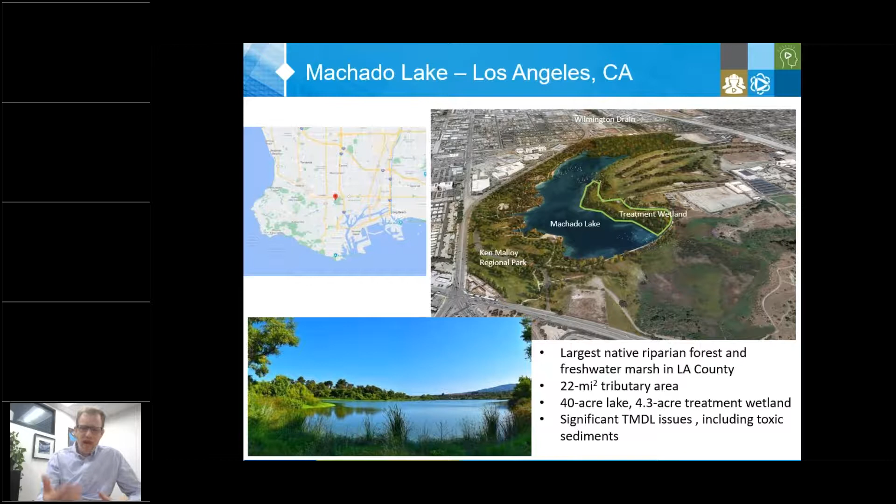The lake itself has had a number of items done to improve water quality, including 240,000 cubic yards of dredging and removal of bed material, an AquaBlok cap, kind of a bio cap along the bottom of the 40-acre lake. They've also installed hydrodynamic separators and other amenities around the park to help improve water quality.

But what I want to point out is this controlled flow wetland, about 4 acres on the east side of the lake. This wetland takes water from the lake, runs it through an oxygenation system, and then water flows through the wetland for nutrient uptake and removal of nutrients within the lake itself, to meet some really stringent nutrient TMDL goals.

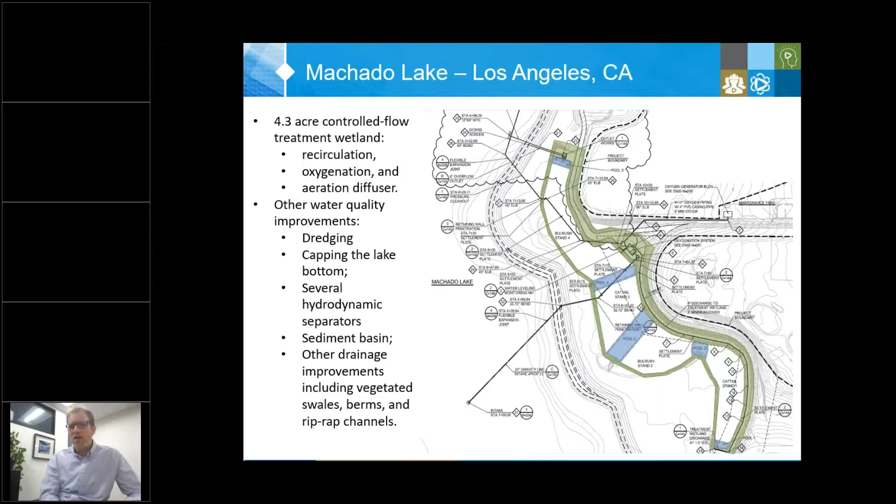The goals for total phosphorus are 0.1 milligrams per liter on a monthly average basis, and for total nitrogen I think it's 1. Our goals for this wetland are actually 0.1 for phosphorus and 0.5 for total nitrogen.

What we found is the normal operating condition, the optimal operation, is about 1 CFS flow through this wetland, recirculating through the lake constantly. If we can maintain that, we should be able to achieve these nutrient goals over the long term.

Obviously, there's an interplay here that the city has to manage with vector control issues and nuisance vegetation issues, but also then, of course, the water quality issues, specifically with the nutrients.

So I'll just note right now, the city is actually entering an optimization phase for the wetland itself, where they're going to be analyzing its performance, since it's only been online for a few years now, to figure out ways we can optimize this to really improve water quality even further.

So I'll leave it there, kind of whetting your appetites for a few of the options we look at here in LA and Southern California for ways we can improve water quality treatment in ponds and lakes. And I'll kick it back to Scott.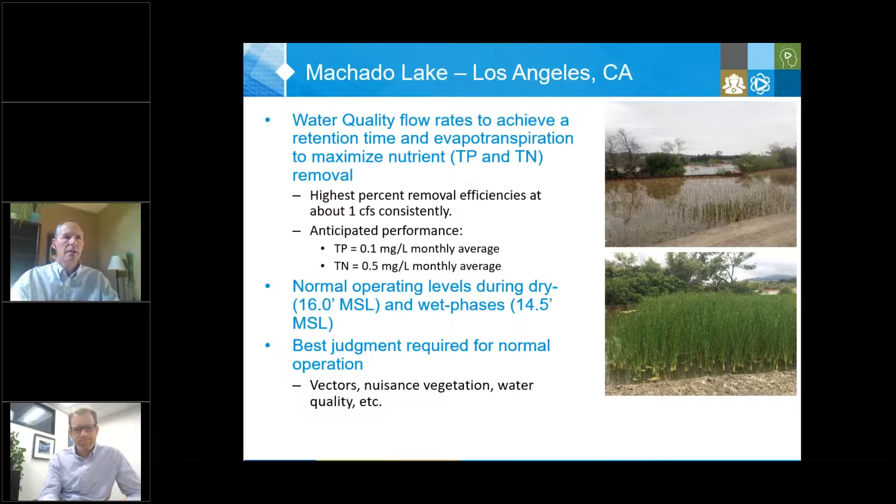Thanks, Chris. That's a good example of using multiple treatment trains to get at the water quality issues Chris was describing, everything from ozonation, a chemical type of treatment, versus natural passive type systems like the constructed wetlands.

So I wanted to move now further to the east, and I was going to grab this example of Omaha, Nebraska. The one thing that's a little bit different with this, and I know Matt at SD1 has similar considerations, is it's a combined sewer system. So oftentimes the driver here is not necessarily a water quality driver, because it is going to the combined system, at least for smaller events.

Everything's going to be going to the treatment plant. The focus of this is actually more on volume and peak flow control, which, as Bob was describing earlier, has an impact on the downstream system. The downstream system for this is actually the Missouri River, which Omaha sits on the bank of, so they're discharging to the Missouri River, but obviously they don't want to have some of those combined sewer overflow discharges. So the intent is to provide that volumetric control.

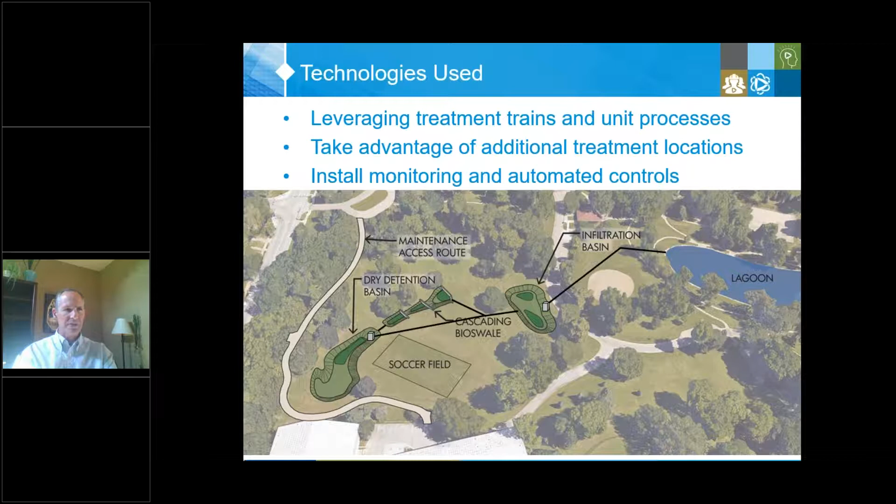We're bringing in a forecasting system, able to predict what storm events are going to occur based on the forecast. We're doing some web-based processing of that in the cloud - taking the National Weather Service's forecast from NOAA into the web dashboard, and also doing analysis where we've run a bunch of different model scenarios. We're using that information to control the actuated valve so we're able to release the correct volume of water, essentially, to create more storage within that lagoon.

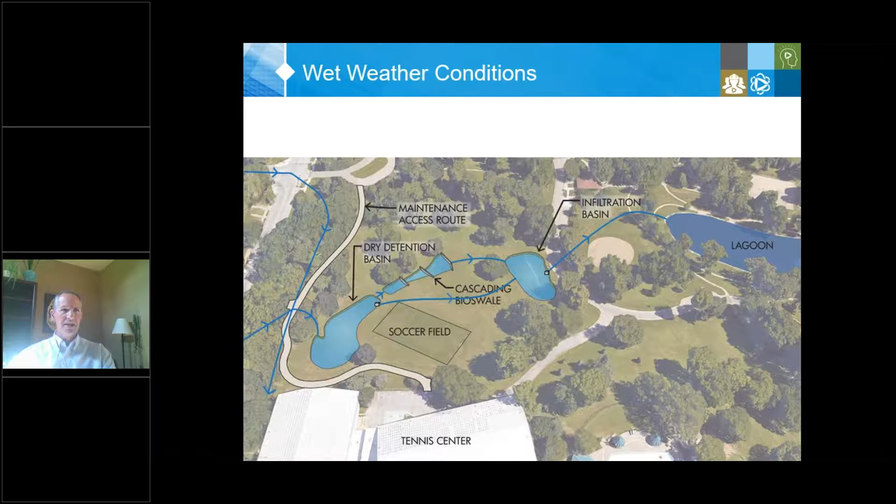So this is the way the system looks if there's wet weather. Flow comes from that western drainage area and fills up these systems. I should mention that the cascading bioswales fell out of the design when we needed to do some cost savings. So we still have this dry detention basin up at the upper end, and an infiltration basin, which actually has two components, and then the lagoon is where the water goes after that.

So this is what it looks like typically. Here's that lagoon or pond - you can see this is a permanent pool. It's lined with these limestone blocks. This is the way the pond was originally. It is being fed by tap water or potable water to maintain this permanent pool.

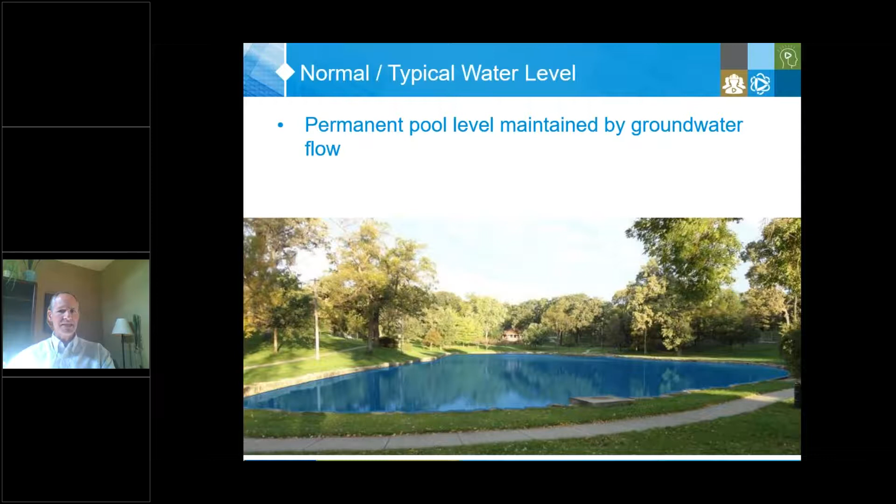So the idea is that we have that normal permanent pool, but when a storm is coming, we draw down that pool to a volume equivalent to the anticipated volume from the storm event. We also have a little bit of freeboard, so we have a margin of safety, some bounce so it can go higher if we're inaccurate in our prediction.

We can actually time that discharge in a way that will protect the downstream combined sewer system, using overall system modeling to determine how quickly it can draw down, or how delayed it needs to be, to protect the downstream wastewater treatment plant.

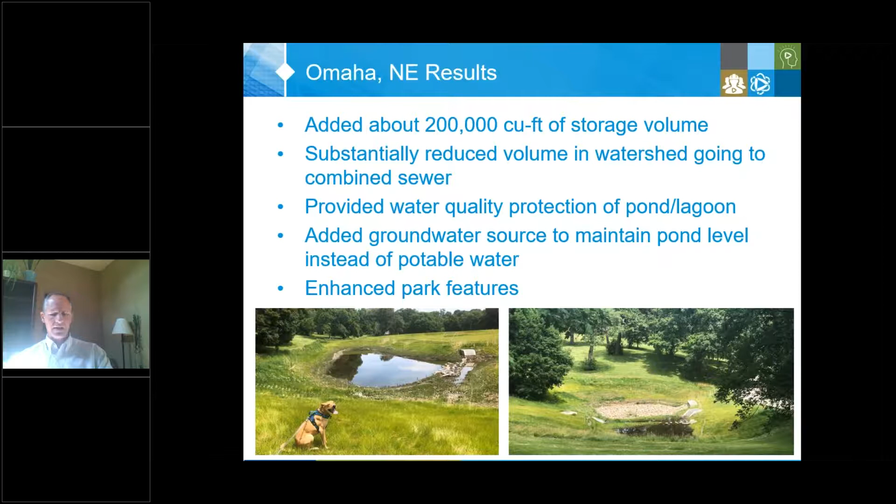All of this was done with the parks service, so we could enhance a lot of the parks as part of it. The playground was enhanced, and the soccer field I mentioned before was also enhanced with this project.

Now we're going to move quite a bit further east, to Howard County. I'm going to hit on some more of these controls, and many of you are familiar with what has happened with Ellicott City. But what this is really talking about is not necessarily what happened in Ellicott City itself, but upstream, some of the small, perhaps minute things happening there.

This involves a retrofit of 3 private ponds, really to gain that water quality credit, but also to provide flood control benefits, which is important given the unfortunate location of Ellicott City—with 2 rivers coming together, hitting the coastal plain and bedrock, and the water not having a lot of places to go.

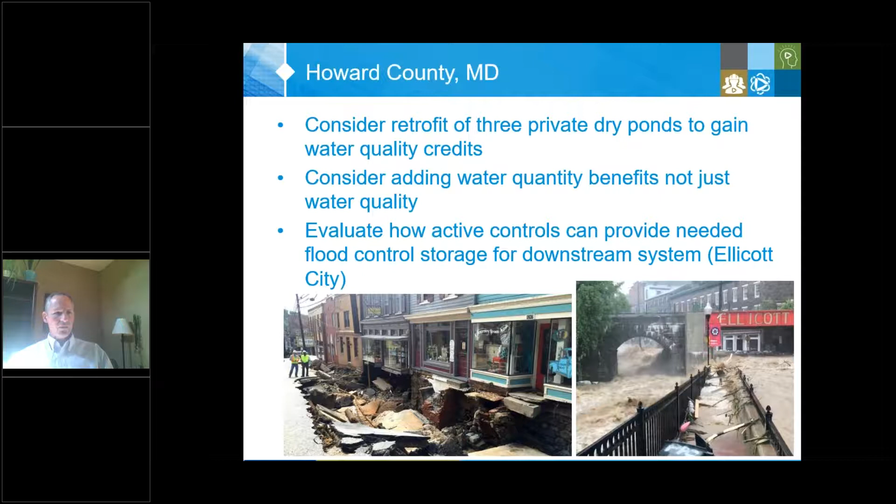The idea is that by retrofitting these dry ponds upstream, we can bring in water quality benefits and also add flood control benefits. We're using a technology called Opti, a company that does real-time controls and weather forecasting, pulling in a 4-foot permanent pool so you're getting the water quality credits and benefits offered in Maryland.

In the pre-Opti scenario, there were about 14 impervious acre credits, and after applying Opti, there were 26 impervious acre credits. They also built in additional freeboard, adding flood control and resiliency. To give you the highlights: wet weather flow reduction improved by 13 times, average retention time increased by 4 times, and there was even a peak flow reduction of nearly 2 times.

I don't have time to go through this graphic in detail, but it's essentially trying to maintain this hydrograph, where the outlet of the pond mimics what would happen naturally—maintaining that water quality volume at the 4 feet, and then shaving that peak off, similar to what Bob and Matt described earlier.

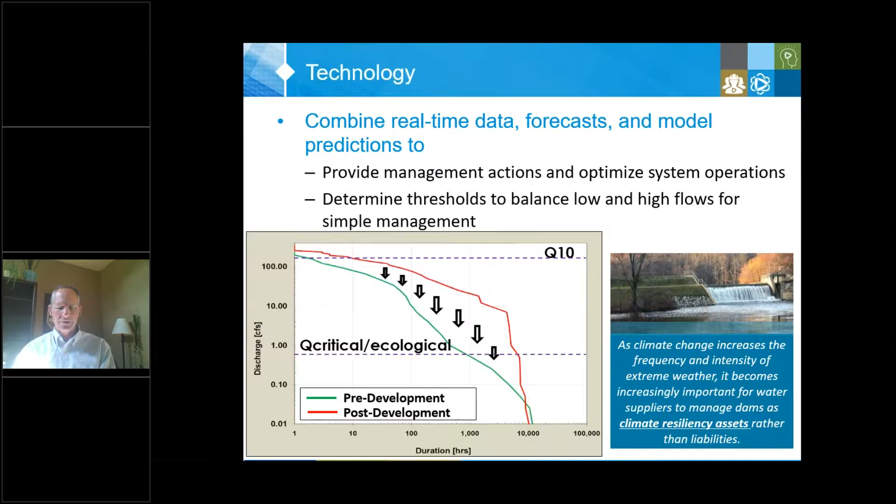So this is the type of outlet retrofit that's happening. Again, this is really informational only—they're using the information to develop the criteria and thresholds described previously in Kentucky, to put in stop logs, for instance, in this type of spillway, to control that level but still maintain the discharge Q critical needed in the streams.

So relatively simple: a solar panel to provide power, some junction boxes, a pressure transducer upstream and downstream, and some calculations used to determine both the ponding elevation and discharge and the downstream flows.

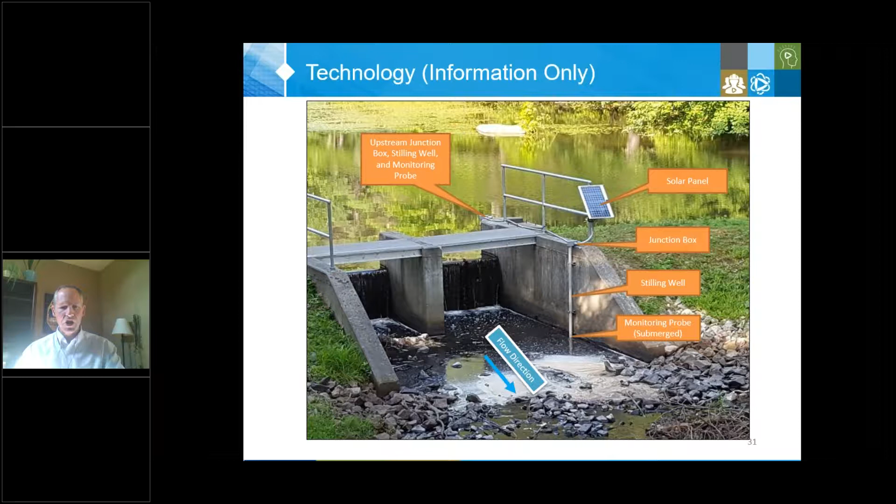Where this is going is that multiple online systems are in this watershed, and the idea is they're adjusting these sluice gates or outfalls in different ways so they can try to keep those Q criticals within the stream, making it a simple adjustment—not quite active, but passive, in putting stop logs into those types of systems. They look at how they can adjust based on weather forecasts, and the sequencing of how they might manage each pond upstream and downstream according to different conditions.

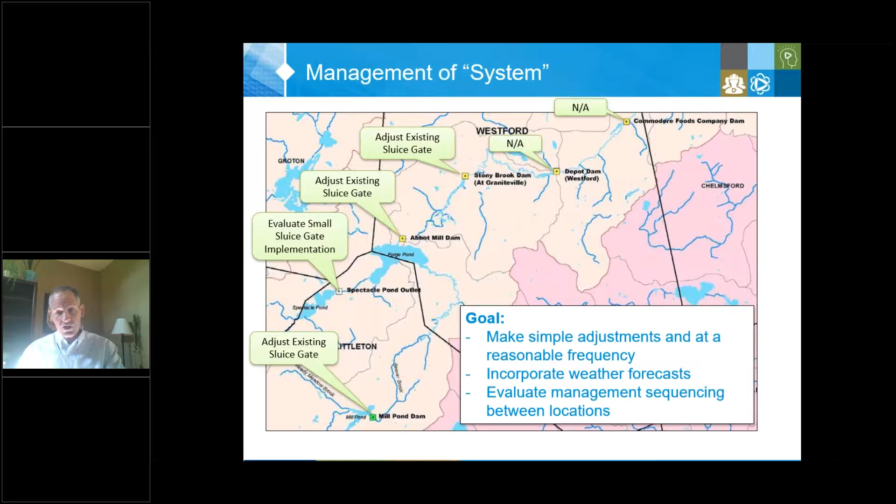So sometimes we do need that pulsing in flows between Q critical and the higher flows, but at least trying to maintain those Q critical flows as much as we can. So that was the objective for putting these types of systems into this main application and managing all these systems together.

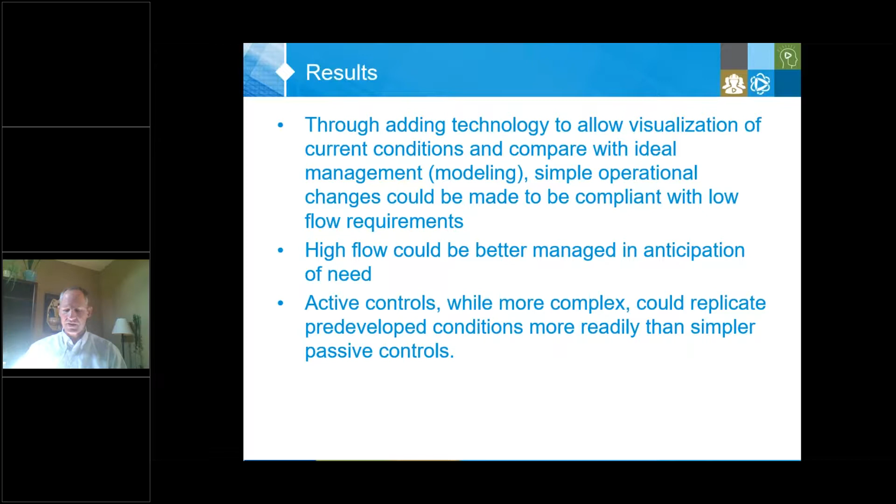Again, the technology is coming in more from an information perspective to provide that understanding of how these things operate, and then how we can adjust those systems passively to achieve those critical flows required from a regulatory perspective. So adding that kind of technology and information really brings in the notion of how to manage this better. It's really more of a management information system that manages this in a simpler way, but also looks at opportunities where bringing in active control could perhaps be easier long term, rather than just doing this from a passive approach.

So I hope we've been able to provide a gamut between simple technologies and complex technologies to reach the multiple benefits we're expecting from our stormwater systems now, looking at things like using treatment trains and unit processes to improve water quality and flood control, even bringing in treatment technologies that might be part of a more active type of system, and considering things like the forecasting approach, which is more complex but often does result in better results in terms of achieving your regulatory requirements in those instances.

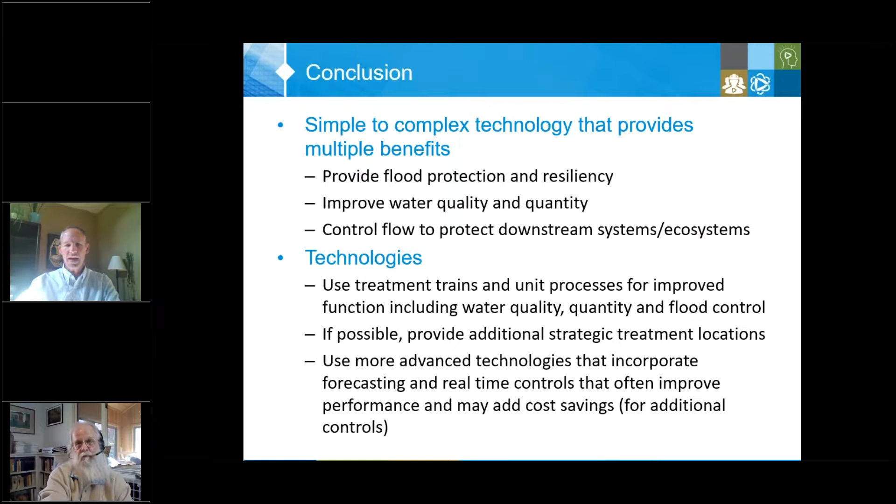So with that, we'll open up to questions, Randy and Seth.

Yeah, thanks Scott. There's a lot that Scott and Chris said. That was a lot. Yeah, we only have a couple minutes right now.